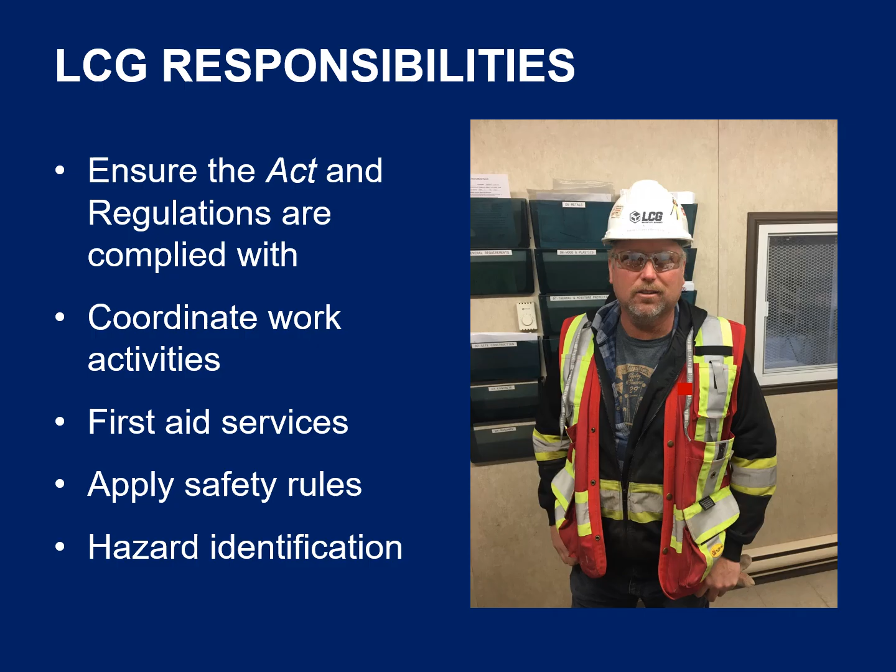Your safety is very important to us. Let's discuss the key health and safety responsibilities for this project. As the general contractor on this project, LCG has several key responsibilities. They include ensuring all project personnel comply with the Act and regulations, coordinating the work activities of all contractors, making sure first aid services are available, applying the safety rules for this project, and raising awareness of potential hazards on the worksite. All contractors on this project, including LCG residential builders, are considered employers.

Each employer has the following key responsibilities and must establish safety policies, programs, and procedures for their employees, provide appropriate training, instruction, and supervision for their workers, correct unsafe acts and unsafe conditions, and ensure the necessary equipment, materials, and protective devices are provided to do the job safely. All employers on the project must also make sure a copy of LCG's Project-Specific Safety Program, or PSSP, is available to workers on the project, and that it has been reviewed and communicated so everyone understands the safety requirements, and maintain a safe and healthy workplace.

Every supervisor has an overall responsibility to ensure the health and safety of the workers they supervise. To help ensure worker safety, all supervisors on this project are responsible to provide workers the necessary written instruction and training to perform their work safely. This includes making sure workers receive a safety orientation to the project, conducting regular safety meetings with the crew, and providing any necessary training for tasks to be performed.

Supervisors must also develop safe work practices when the work requires it. They must also ensure the appropriate personal protective equipment is issued and worn, and make sure tools and equipment are used appropriately and are properly maintained. Supervisors are also responsible to inspect the work area weekly for potential hazards, advise workers of actual or potential hazards, correct any unsafe conditions, make sure all project safety rules are understood and followed, investigate and determine the cause of all incidents so corrective action can be taken, and lead by example by demonstrating a safety-first approach.

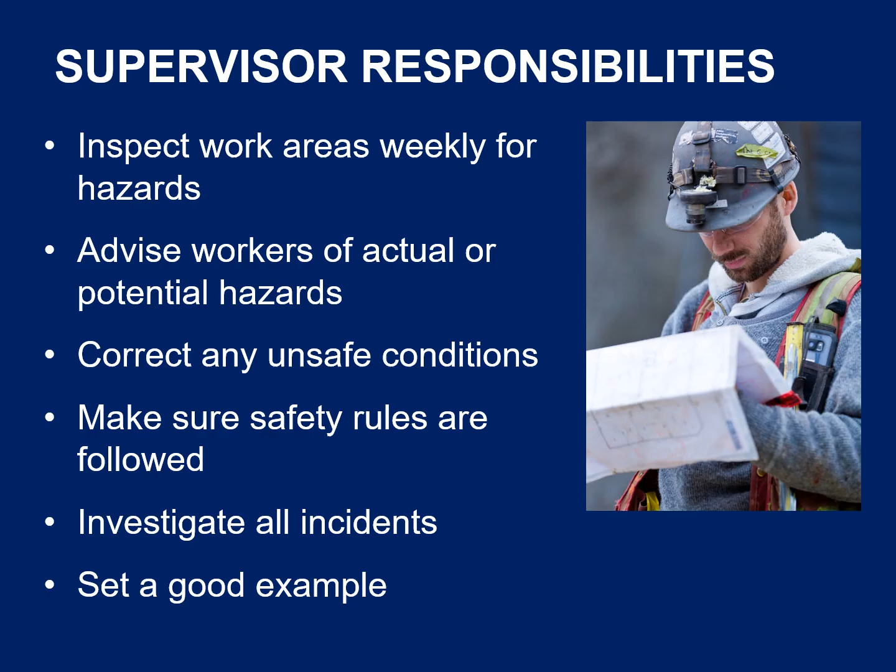As a worker on this project, you have specific responsibilities to assist in making this a safe and healthy worksite. You must comply with the Act and regulations. You are required to follow all safety rules on this project. If you are unsure of the rules or have any questions about them, ask your supervisor. You must immediately report all hazards or unsafe conditions to your supervisor so the conditions can be corrected. If you are assigned work that you believe to be unsafe or hazardous, you have the right and obligation to refuse to perform unsafe work.

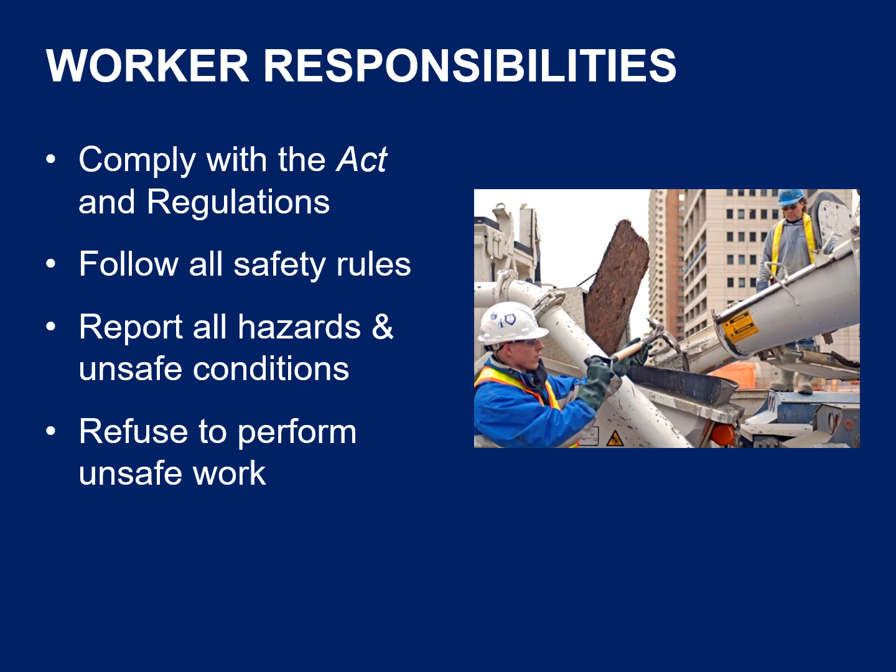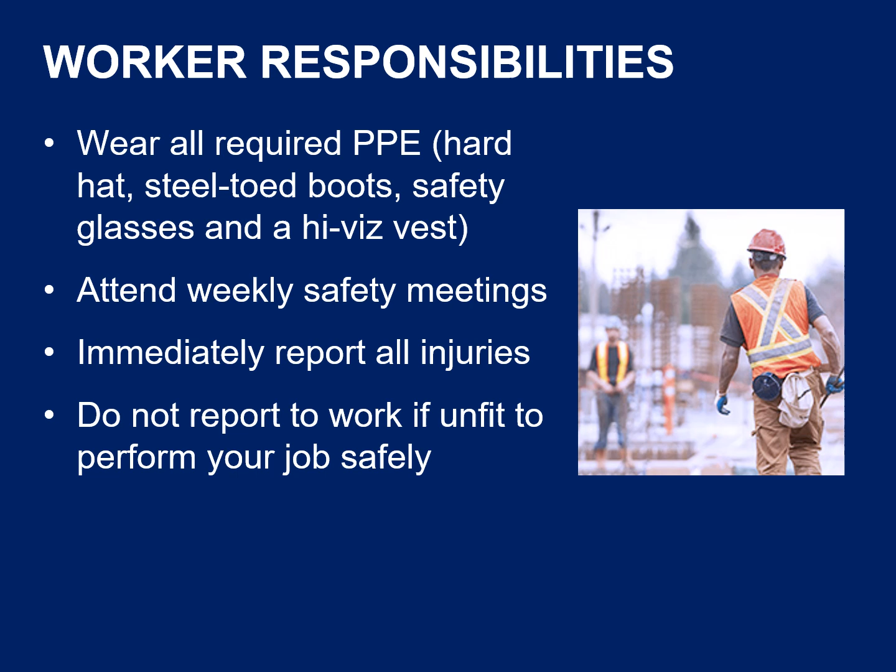For your own safety, wear all required personal protective equipment, as well as any other equipment necessary to do your assigned tasks safely. It is also your responsibility to attend and participate in your employer's safety meetings. If you are injured while working, report it to your supervisor and get assessed by first aid, no matter how minor the injury may be. Do not report to work if you are unfit in any way. If you are taking prescription medication for a medical condition, inform your supervisor. You may be assigned to a less hazardous activity to help keep you and others safe. Finally, if you have any ideas to make this project safer, share your ideas with your supervisor.

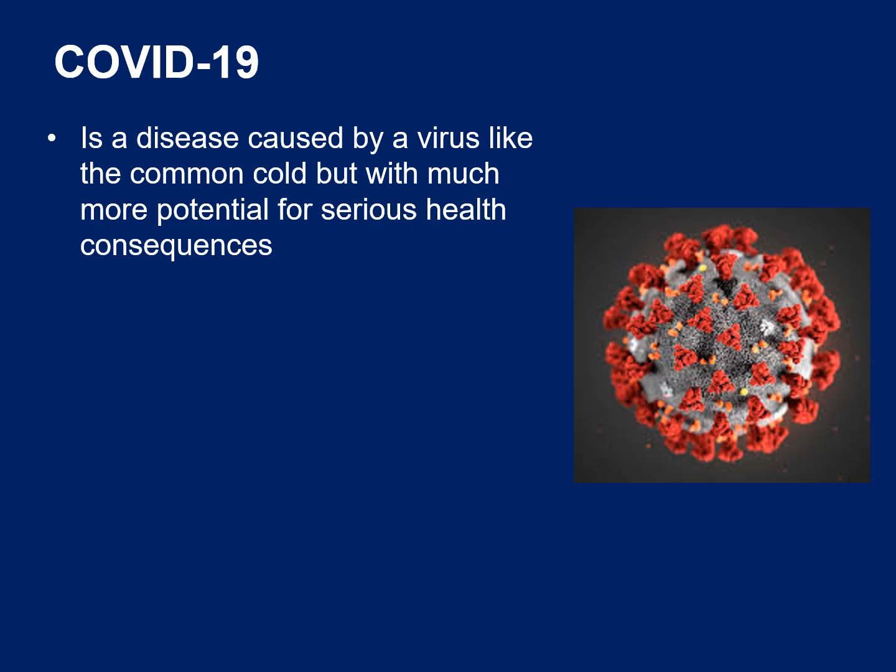How we conduct ourselves and our work on construction sites has changed because of COVID-19. COVID-19 is a disease caused by a highly contagious virus like the common cold, but with much more potential for serious health consequences. The principal mode of transmission is through contact with airborne droplets from sneezing, coughing, or possibly talking from an infected person. Some people have also become infected by touching contaminated surfaces and transferring the virus to their eyes, mouth, or nose. Your adherence to safety protocols at work and at home is a key to reducing the spread of COVID-19 and preventing infections between workers at the construction site.

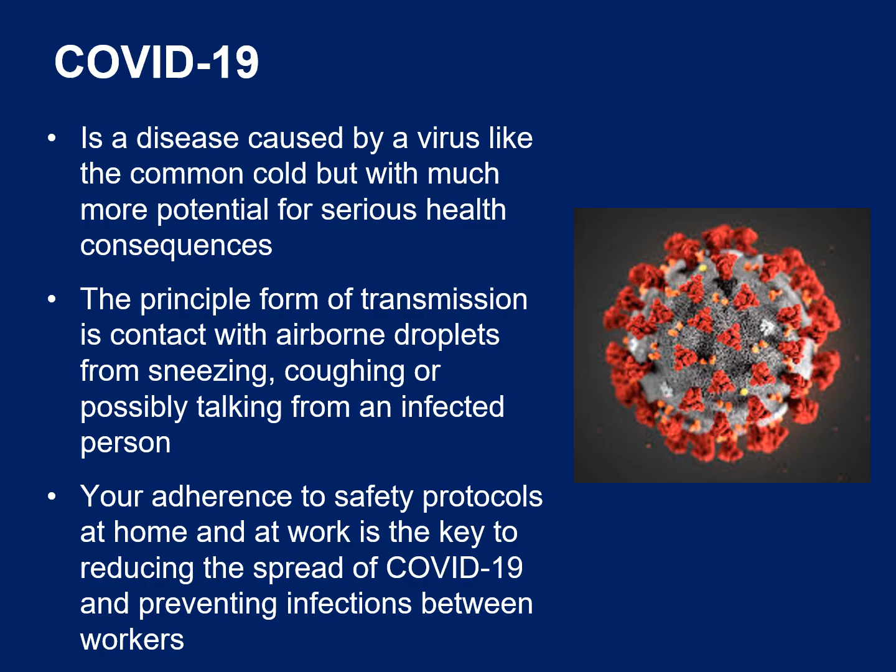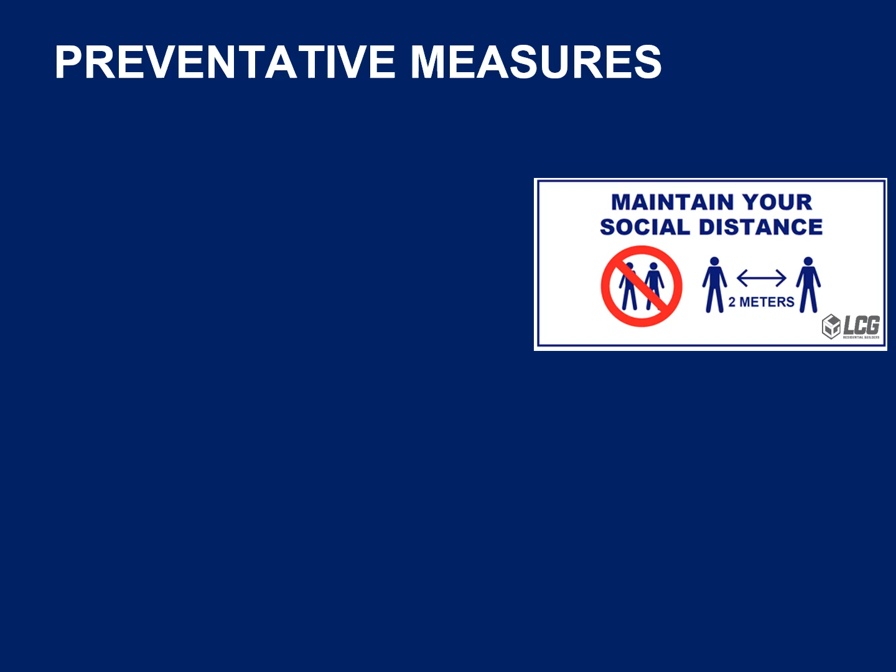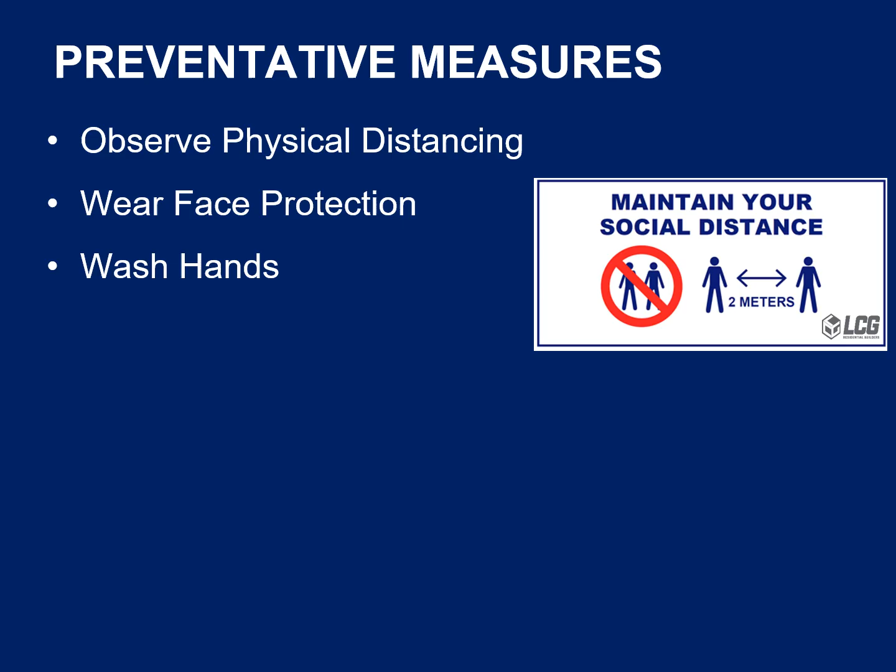LCG COVID-19 preventative measures are based on recommendations from the Public Health Authority and focus on physical distancing, hand washing, cleaning and disinfecting, specialized work procedures, and health monitoring. Physical distancing is the practice of avoiding close contact and maintaining 6 feet or 2 meters between each other. When this is not practicable, workers are required to wear a form of face protection. Hand washing, especially at the start of shift prior to work and at the end of shift prior to going home, are important methods for preventing COVID-19. Cleaning and disinfecting prevent the transmission of COVID-19 from frequently touched surfaces.

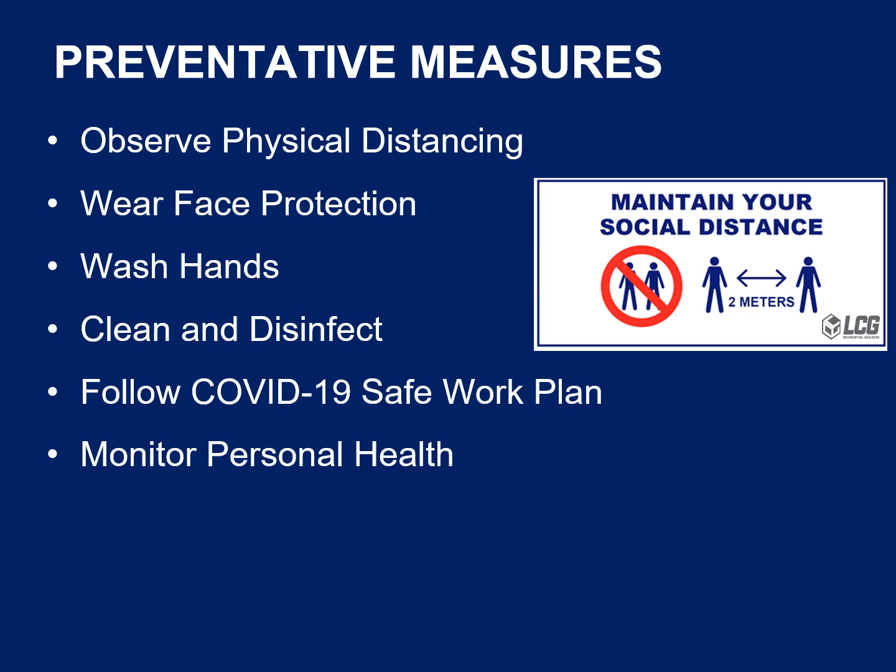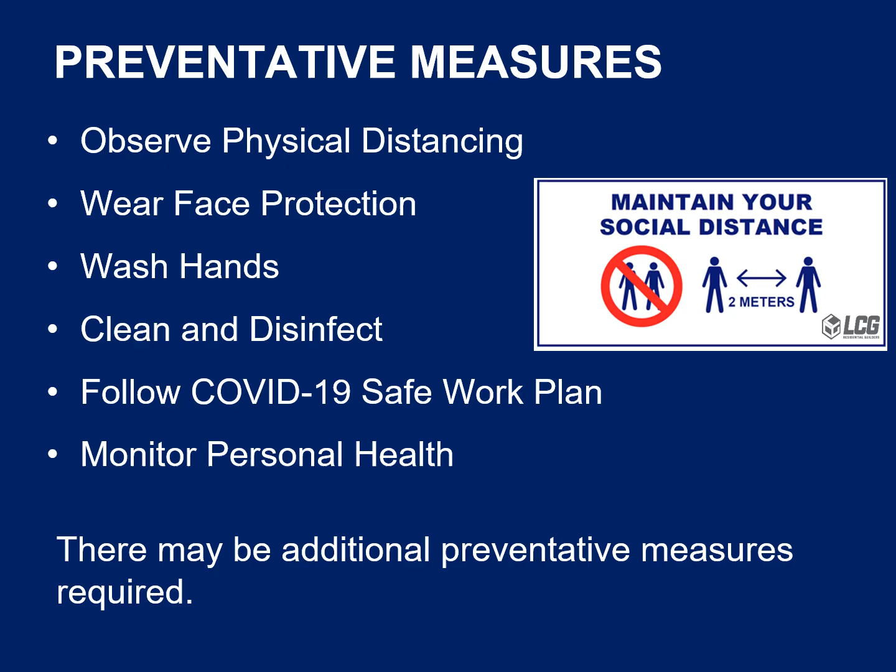Contractors are required to develop their own COVID-19 safe work plan. Ideally, this plan will organize work and workers to reduce contact between workers and limit the potential for transmission. Last and most importantly, workers must monitor their health and not come to work if they are exhibiting symptoms of COVID-19. LCG's health questionnaire and contractors' daily health check verification are organized to keep everyone involved and vigilant, monitoring workers for symptoms of COVID-19. There may be additional preventative measures required at this work location, and they will be reviewed with you at the conclusion of this presentation.

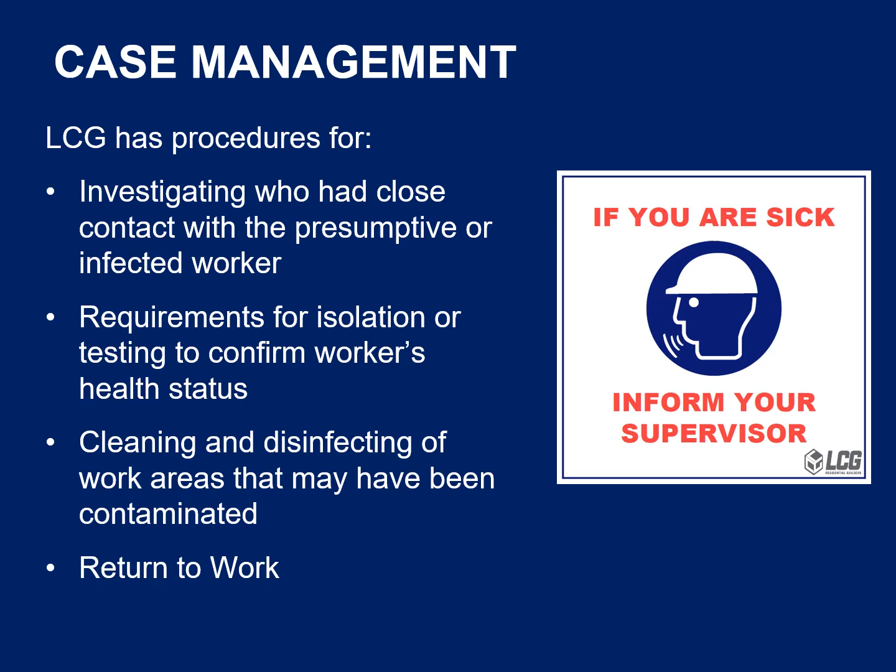In the event of a presumptive or positive case of COVID-19, LCG has procedures for investigating who had close contact with the presumptive or infected worker, requirements for isolation or testing to confirm worker health status, cleaning and disinfecting work areas that may have been contaminated to make them safe for workers, and return to work procedures. If there is a potential that you have been exposed, you will be notified.

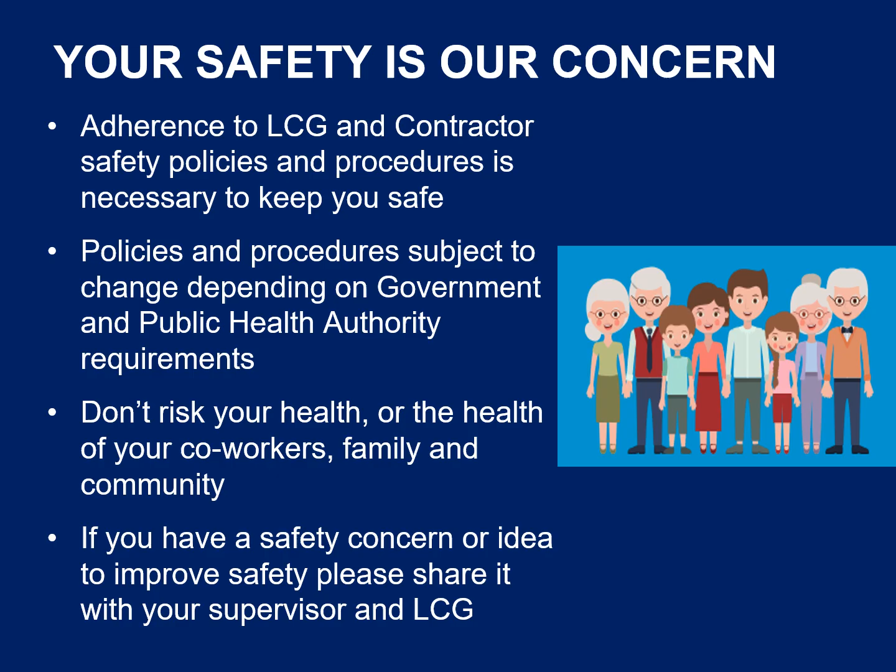Your health and safety is our principal concern. Adherence to LCG and contractor safety policies and procedures is necessary to keep you safe. These policies and procedures are subject to change depending on requirements of local government and public health authority. Workers who do not comply are risking their health, the health of all workers at the workplace, and the health of their family and community. If you have a safety concern or an idea to improve safety, please share it with your supervisor and LCG, and stay safe. We will now briefly describe the emergency response plan for this project.

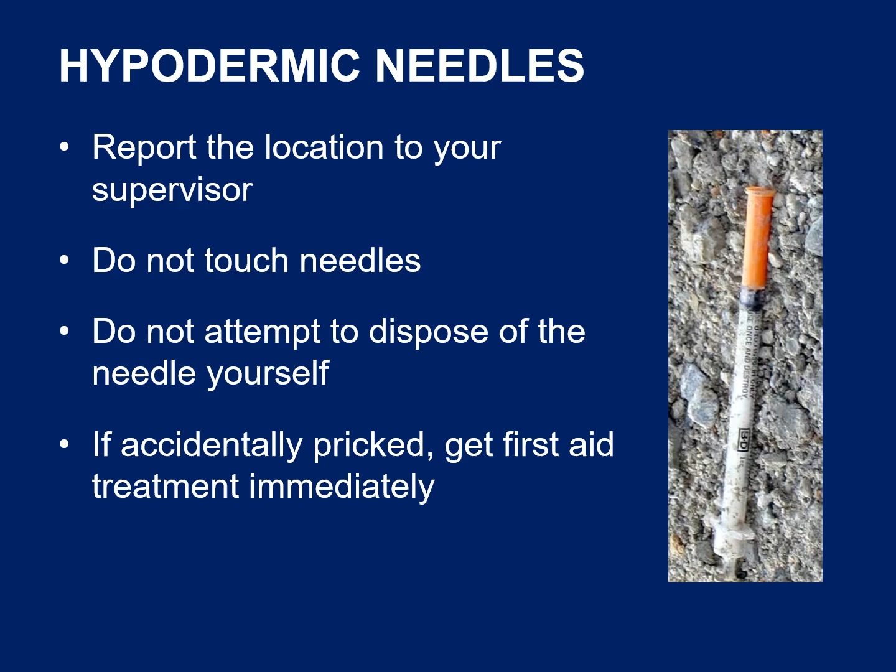If you find a discarded hypodermic needle on or near the project, report the location of the needle to your supervisor immediately. Do not touch any discarded needles as they may contain an infectious disease. Do not attempt to dispose of the needle yourself. If you are accidentally struck by a needle, report to the project's first aid attendant immediately. This section will describe the project's means of communicating health and safety information to you. To help keep you informed, please refer to the project information board posted at the main site office.

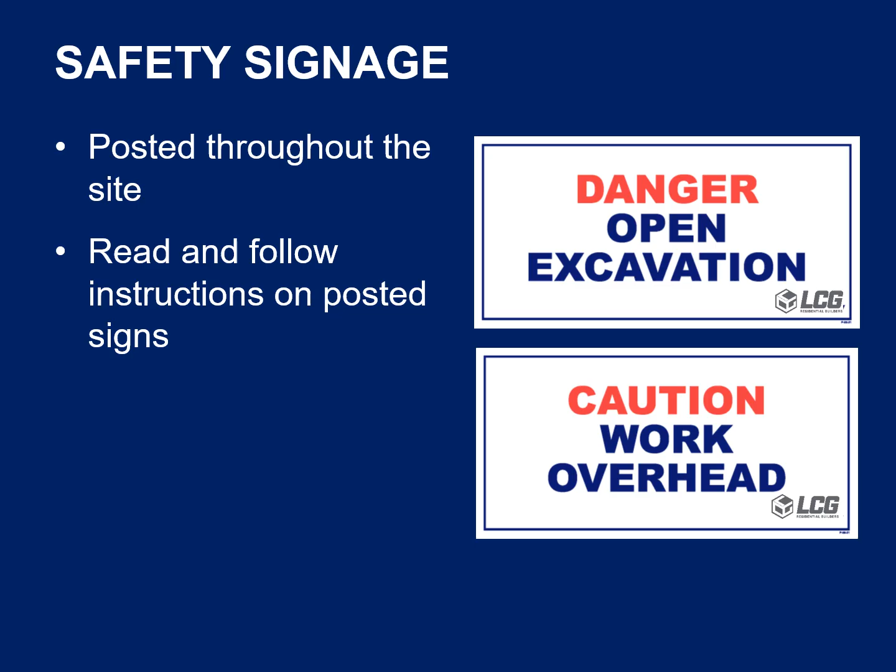Safety signs are posted throughout the site to warn you of potential hazards in the area. It is important that you read all signs in your work area and follow the instructions. If you place signs where you are working, please remove the signs at the completion of your work in the area.

Colored barricade tape will be used on this project to warn you of potential hazards in a marked area. Yellow caution tape means that there may be potential hazards and you should proceed with caution when entering the marked area. Red danger tape indicates there is an immediate hazard present and you are not to enter unless authorized by the crew that barricaded the area.

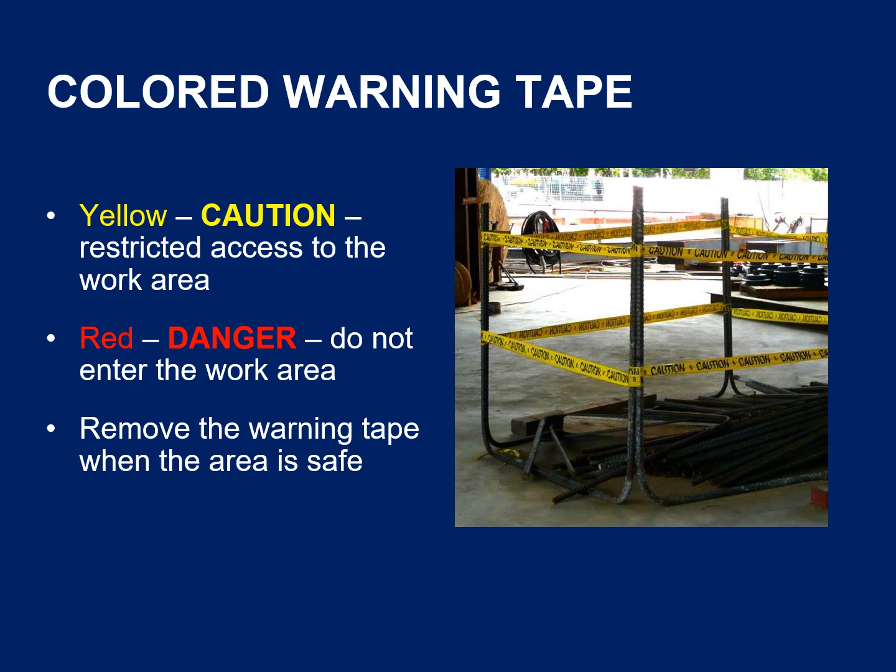If you use colored warning tape to mark a work area, we ask you to remove it when the area is safe for workers to enter. To assist in maintaining a safe and healthy work site, each employer must conduct regular documented inspections of tools, equipment, machinery, and work areas. The inspections must be conducted at intervals to prevent unsafe working conditions from developing. To help keep workers informed, safety inspections conducted by LCG superintendents will be posted on the Health and Safety Board.

LCG will organize a joint health and safety committee on this project where the number of regular employees exceeds 19 and where the project duration is expected to be over 3 months. The committee is represented at minimum by 1 worker and 1 management member. All recommendations for improved health and safety on site are forwarded to the LCG superintendent to take appropriate action. The minutes of all issues discussed and recommendations are posted on the Health and Safety Notice Board.

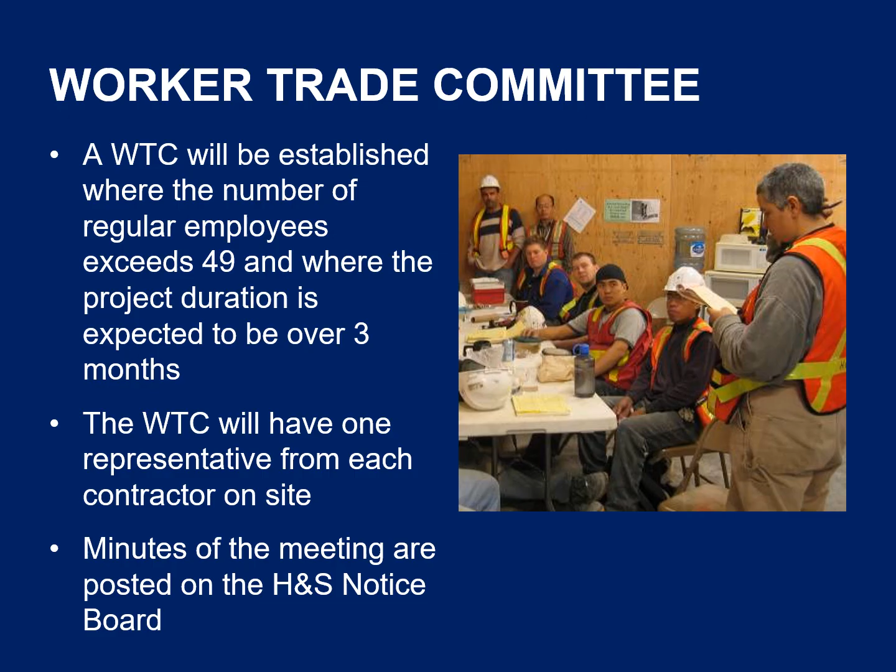LCG will host a worker trade committee on this project where the number of regular employees exceeds 49 and where the project duration is expected to be over 3 months. The committee is represented by 1 worker from every contractor on site, and the chair is elected by the members. All recommendations for improved health and safety on site are forwarded to the LCG superintendent to take appropriate action. The minutes of all issues discussed and recommendations are posted on the Health and Safety Notice Board.

To help keep everyone informed on health and safety issues, all employers must conduct a weekly safety meeting with their crew. You are required to attend your employer's safety meetings. If you have any safety concerns between your employer's scheduled safety meetings, please notify your supervisor immediately.

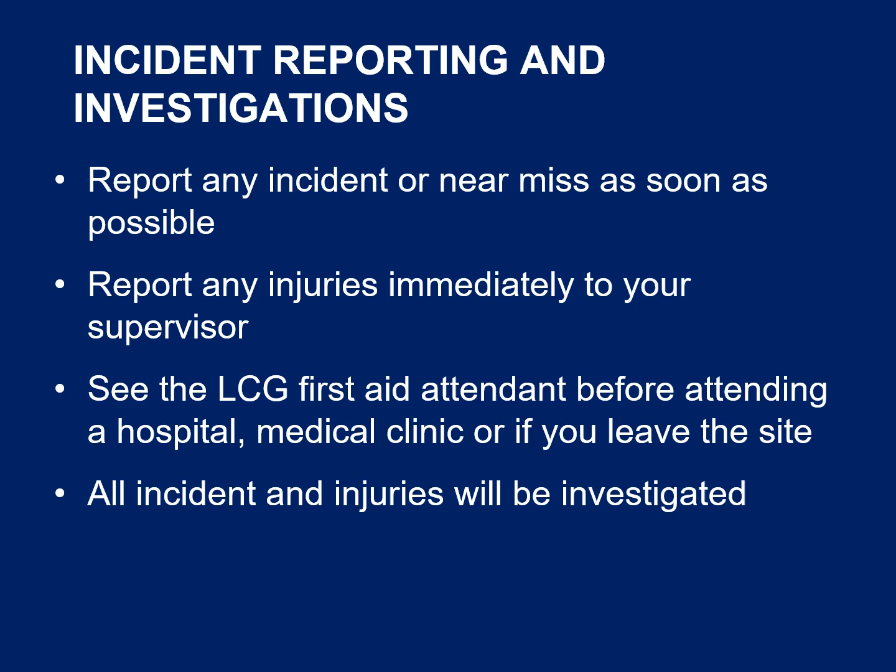It is your responsibility to report any incident or near miss to your supervisor or an LCG representative as soon as possible. If you have sustained an injury on this job site, please report your injury immediately to your supervisor and see the project first aid attendant before you attend a hospital, medical clinic, or leave the site. All near misses and incidents will be investigated to ensure the appropriate corrective measures are in place. The investigation results and corrective measures will be shared with you.

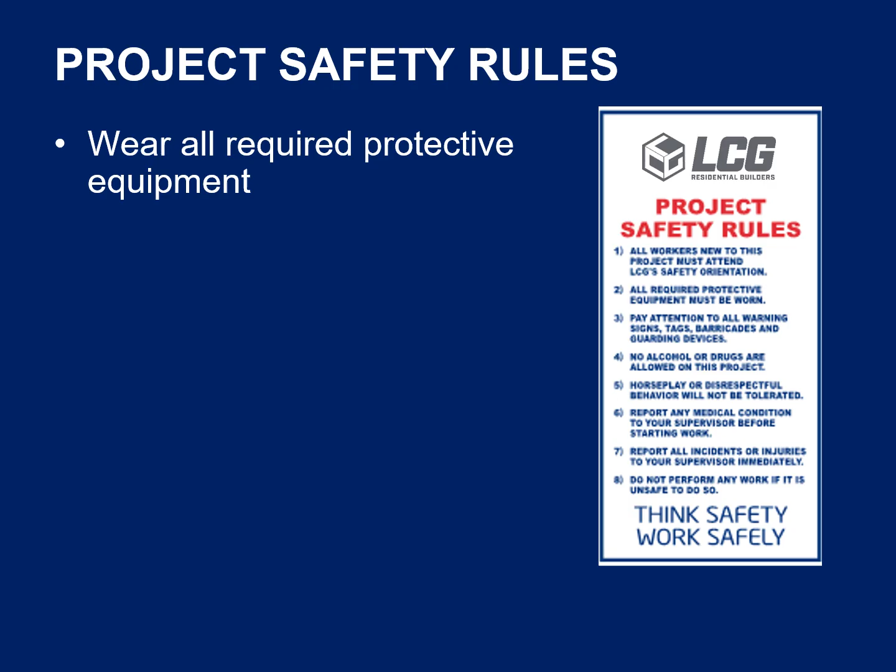We will now review some of the important safety rules for this project. As a worker on this project, you have the responsibility to comply with the project safety rules, including wearing all required protective equipment, not possessing or consuming alcohol or drugs, not engaging in horseplay or other inappropriate behavior, reporting all incidents and injuries to your supervisor immediately, and refusing to perform any unsafe work. For a more complete list, review the project rules in the back of the orientation checklist you were provided.

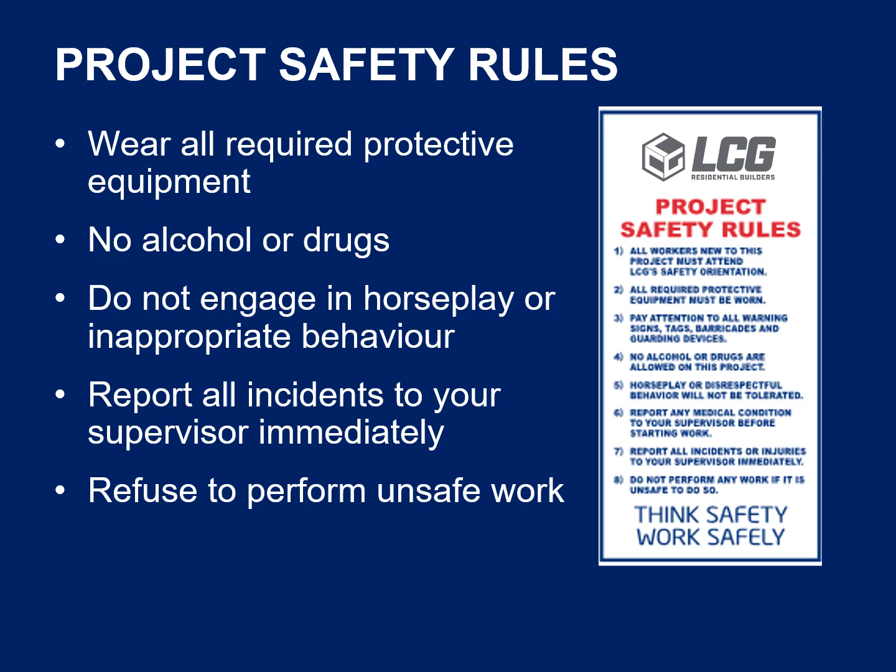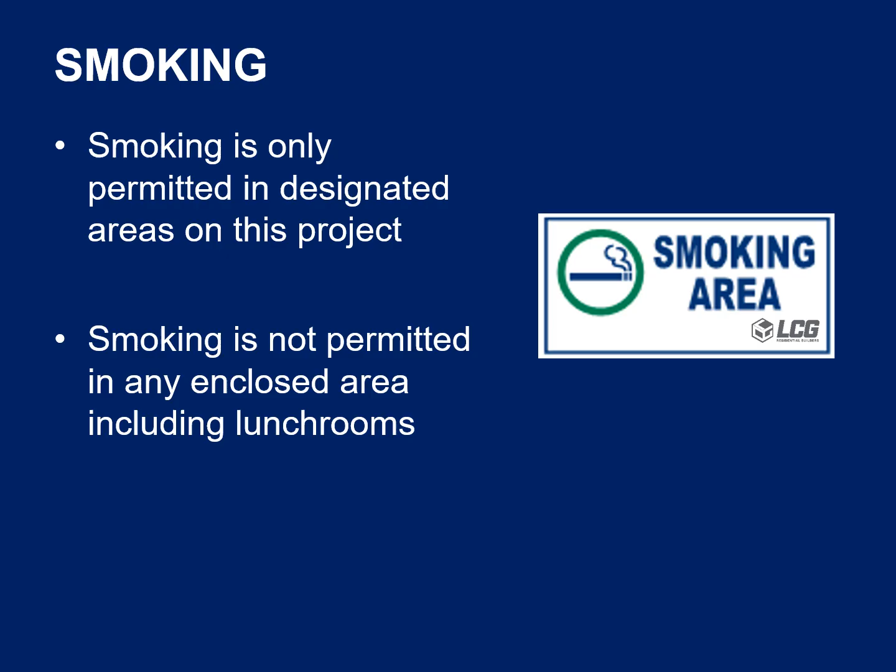You are only allowed to smoke in designated areas on this project. You are not permitted to smoke in any area where there are signs indicating no smoking, or in any enclosed areas of the building, in job site trailers, in any lunchroom, or in portable toilets and washrooms.

The use of portable music players and radios is not permitted on this project. Such devices can distract you and lead to an incident, or the sound can interfere with communications on site in the event of an emergency. Cell phones should only be used for work purposes and only if you are in a safe location and not operating any tools or equipment. All calls should be made away from the active work area.

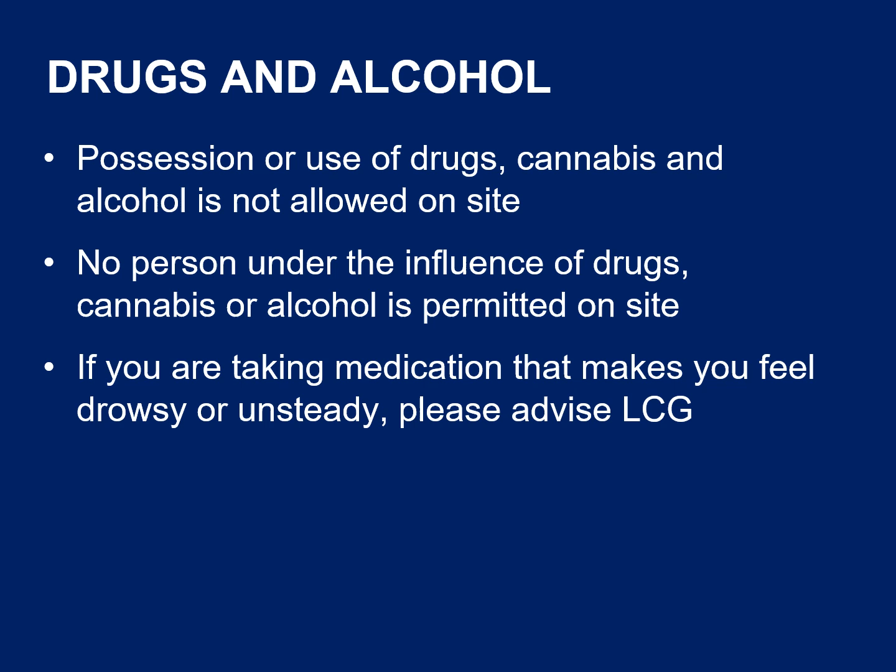The possession or use of drugs, cannabis, and alcohol is not permitted on any LCG project. No person under the influence of drugs, cannabis, and alcohol can be allowed on site for their own safety and for the safety of others. If you are taking medication that makes you feel drowsy or unsteady, please advise an LCG representative. Any person in violation of LCG Residential Builders' drug and alcohol rules will be immediately removed from the project.

Everyone has the right to a safe and respectful workplace. LCG's prevention of harassment and violence policy applies to all workers on this project. Harassment includes any unwanted comments or behavior that insults another person's race, gender, language, or religious beliefs. Harassment and disrespectful behavior will not be tolerated and may result in disciplinary action. You can find LCG's harassment policy posted on the Project Information Board.

Site photography is permitted for business and investigative purposes. Sharing project photos on social media is not permitted unless prior permission is obtained from LCG Residential Builders. Workers are not authorized to provide any information about this project to the media. In the event that media organizations focus their attention on this project, we ask that you politely decline to answer questions or provide comments, and that you direct all inquiries to LCG.

All workers and supervisors must follow the project safety rules. Anyone who does not follow these rules could be subject to disciplinary action, depending on the severity of the infraction. Disciplinary action may range from a verbal warning to a written warning or removal from the project.

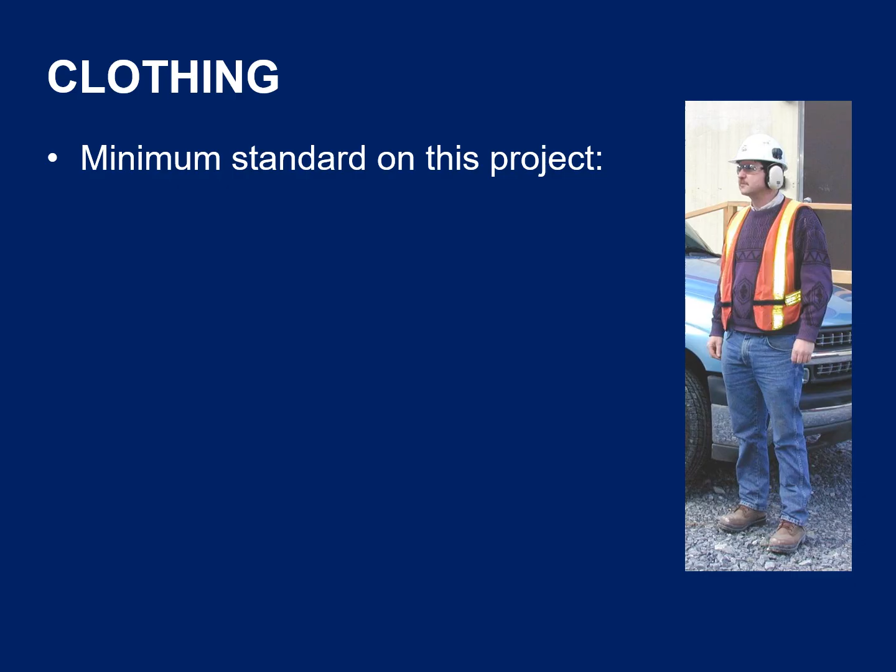This section will now describe the personal protective equipment, or PPE, required on this project. To help keep you safe at work, you need to properly equip yourself for the job. The minimum standard for personal clothing includes the following. The pant leg must extend to the top of your safety footwear. Your shirt must cover the shoulders and have sleeves at least 4 inches long. The following items are not acceptable to wear on site: sleeveless t-shirts, shorts, running shoes, and any clothing that contains offensive messages or graphics.

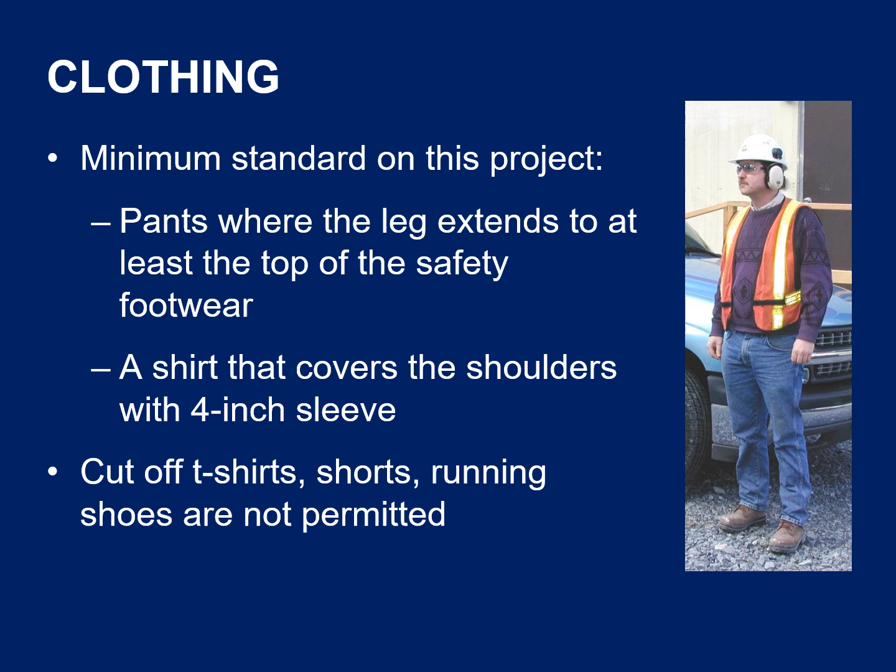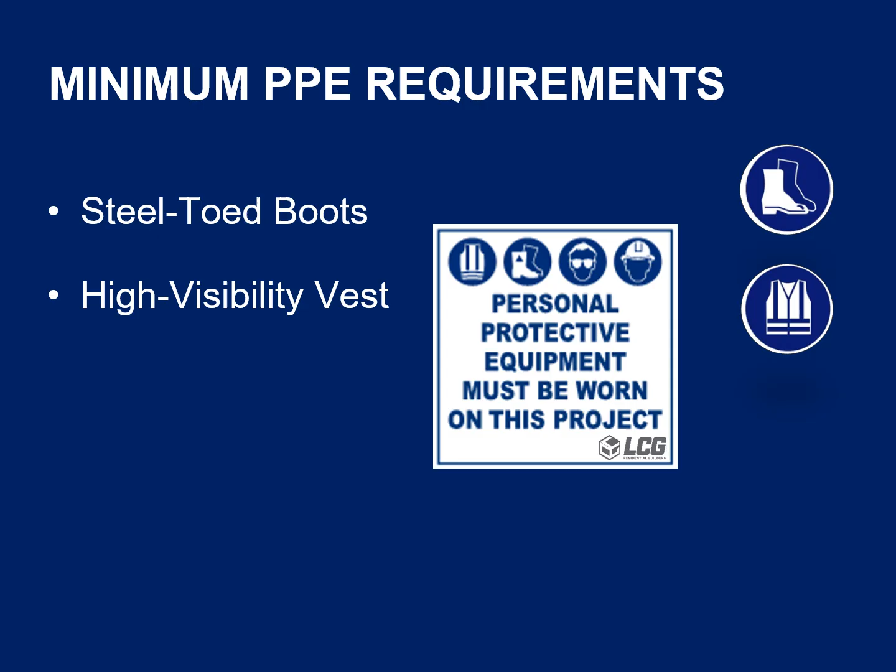The minimum PPE requirements that every person must wear on this project are steel-toed boots, a high-visibility vest, safety glasses, and a hard hat. Some work assignments may require the use of additional PPE, such as hearing protection when noise in the work area rises above 85 decibels, or respiratory protection when moderate to high airborne dust concentrations are present. Other personal protective equipment may be needed for you to safely perform your work task, such as gloves, a face shield, knee pads, or chainsaw chaps. If you're not sure about what PPE is needed for your task, ask your supervisor.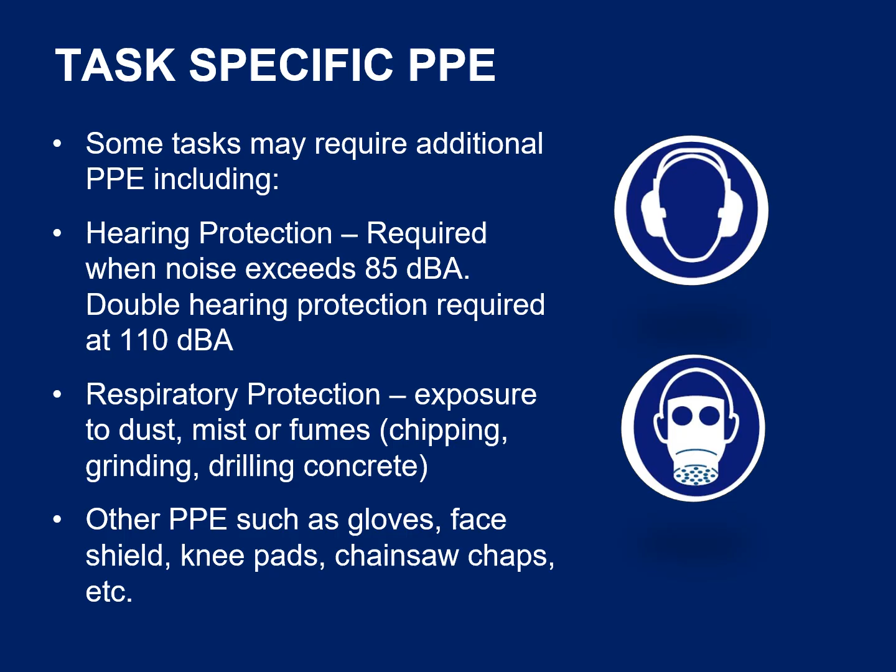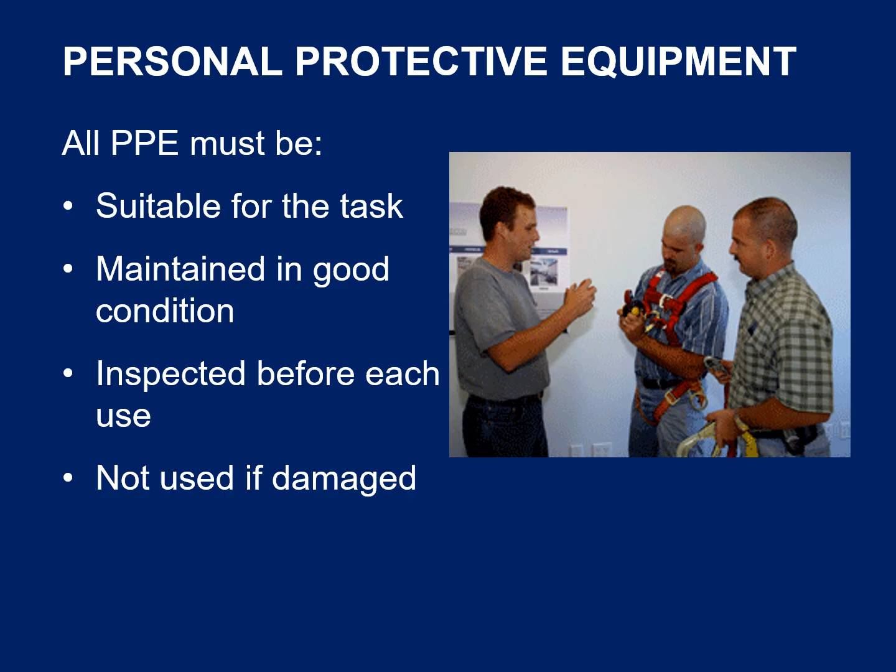Make sure that your PPE is suitable to the tasks you will be performing, and that all of your equipment is in good condition. It is best practice to perform a daily inspection for defects or wear on all of your personal protective equipment. Do not use PPE that is damaged. Return damaged PPE to your supervisor and request a replacement. The following potential hazards may be present on this project. We will describe methods to eliminate or control each potential hazard.

At times, construction work on this project will affect pedestrian traffic. When working in areas near the public, take measures to control your work area or prevent entry by pedestrians or cyclists. Post signs on sidewalks to give people advance warning of the construction work taking place. Install directional signage and barricades to detour people safely around the work area. Control pedestrian and traffic movement, and keep construction materials out of all public access routes.

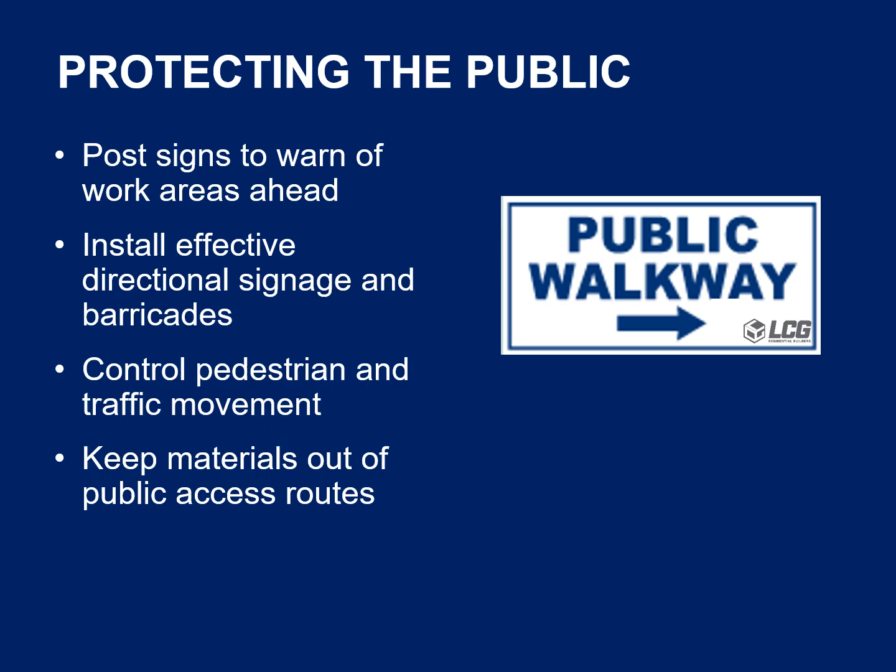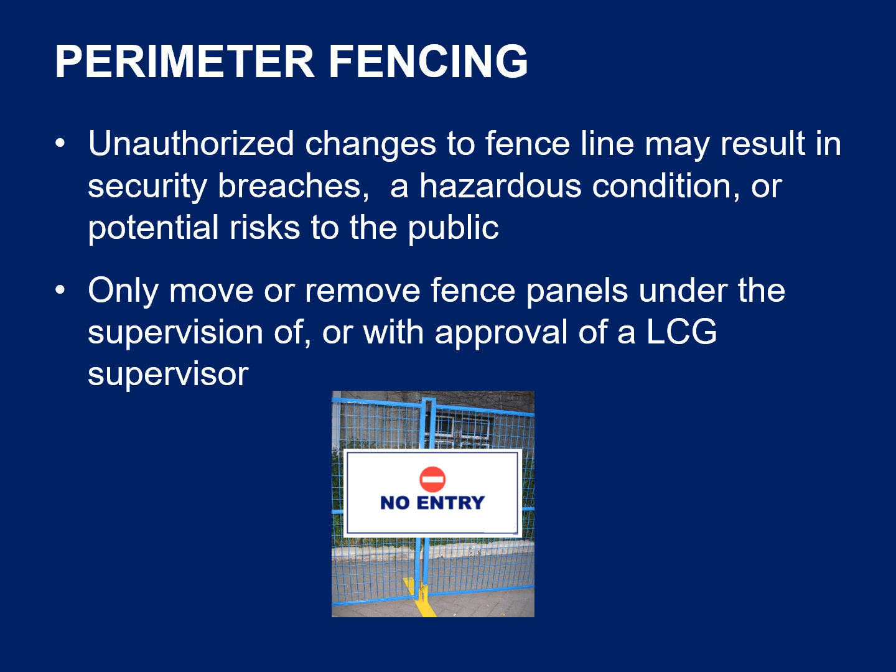Unauthorized changes to the perimeter fence line could result in security breaches or could lead to a potential hazard to workers or members of the public. Temporary fencing panels must be properly installed to prevent incidents such as fence sections falling over or people tripping on base plates. If sections of fencing need to be changed for temporary access to an area of the project, then LCG Residential Builders must be notified and permission must be obtained before any fencing is moved or removed.

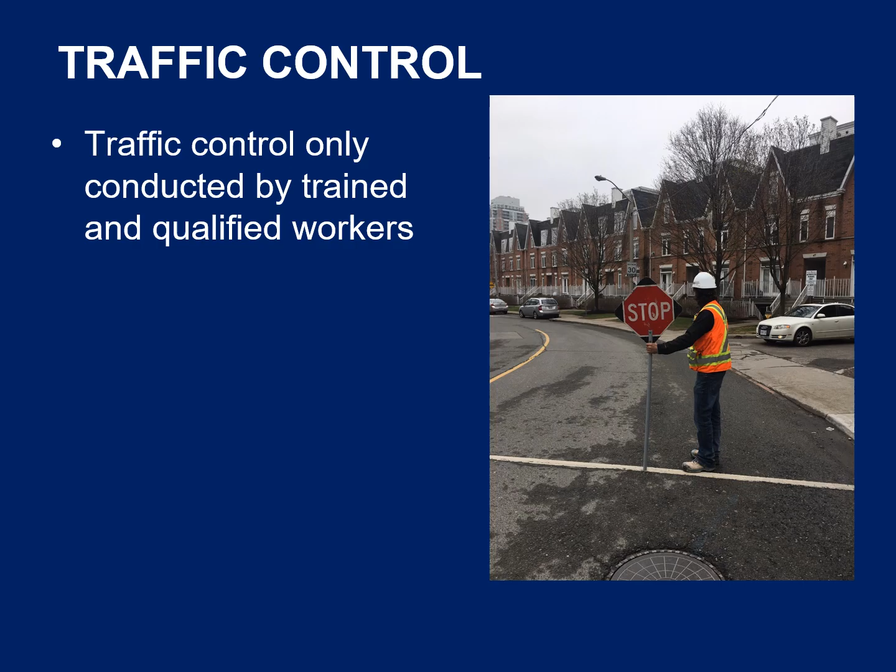When temporary traffic control measures are required, only trained and qualified workers are allowed to perform traffic control or flagging duties, no exceptions. A written traffic control plan must be in place before any traffic control work is performed. The traffic control plan will determine the type and location of all temporary traffic signage, delineators, and the use of the required PPE for the flaggers. All flaggers are to use the stop-slow paddles to clearly communicate instructions to vehicles.

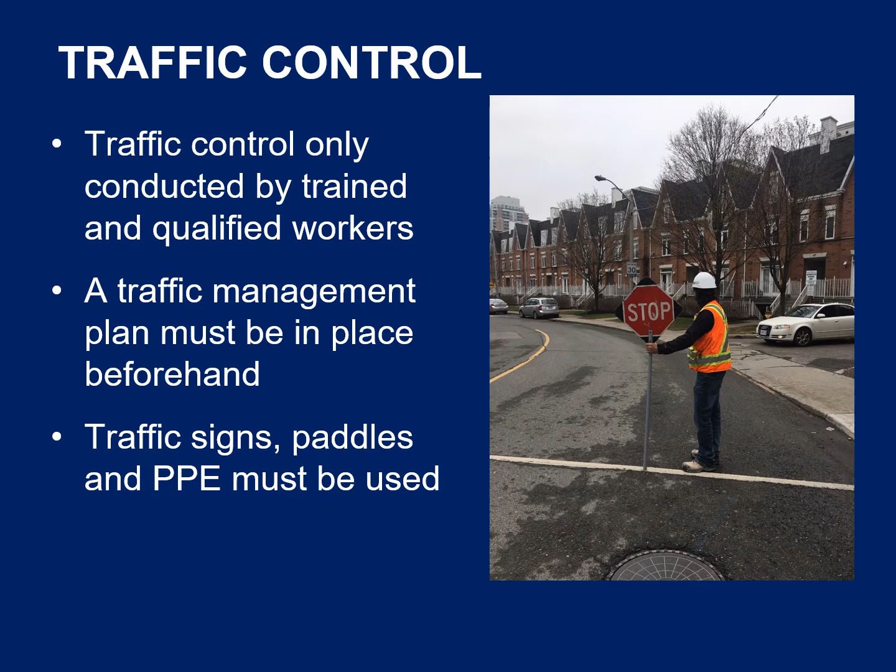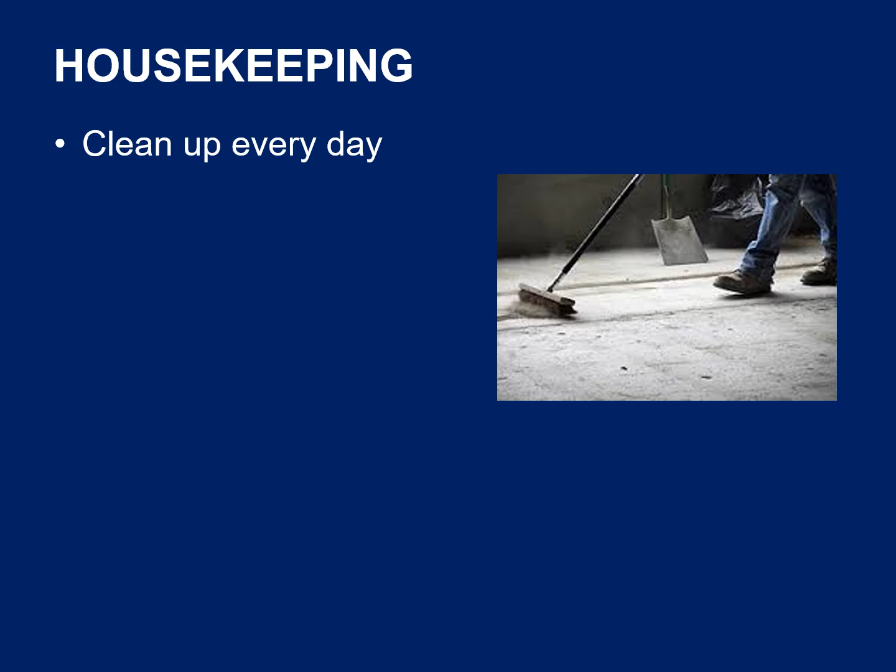Good housekeeping practices indicate a safe site. We ask that you do your part in keeping the project clean and tidy. Clean up your immediate work area before you leave it to go to another work area and at the end of each day. Keep construction debris, building materials, light strings, and electrical cords out of access or egress routes, such as stairwells, walkways, and doorways. Store materials in a safe area and tie down or secure material from falling into work areas or being blown from the building by high winds.

A network of underground utilities may be located on this project site. Exposing buried utilities can be costly and cause serious injury. This network may include gas, electrical, telephone, fiber optic, sewer, and water lines that could be damaged if you dig in the wrong spot. Always call your region's one-call center before you begin. Valid locates must be obtained and submitted to LCG and present in the operator's cab prior to any excavation.

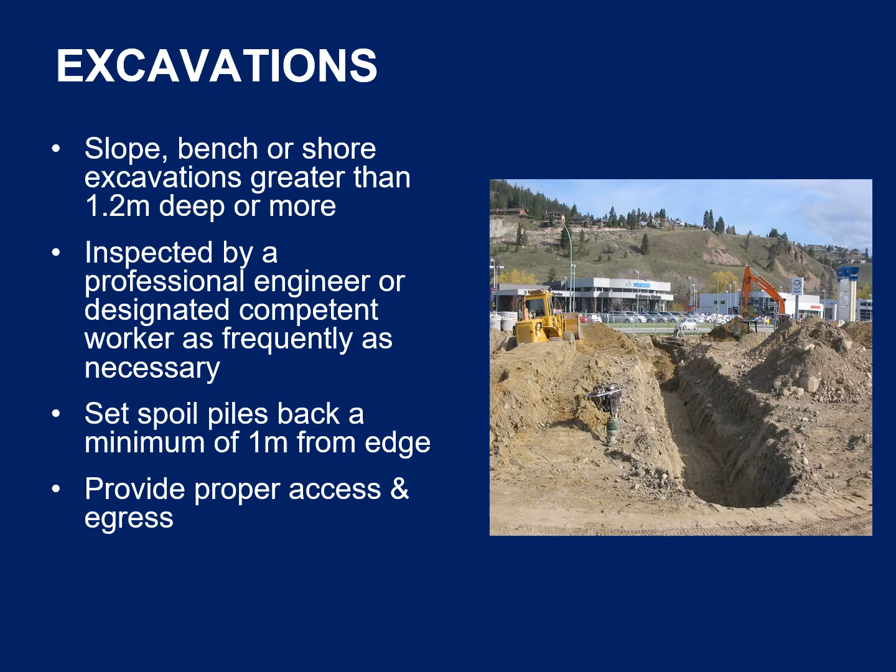If you are working in and around excavations, remember that excavations and trenches greater than 1.2 meters in depth must be sloped, benched, or shored, and that it must be inspected by a professional engineer or designated competent worker before you enter the excavation. Also remember that spoil piles must remain 1 meter back from the top of the excavation edge, and that all excavations must have safe access and egress systems, such as a ladder.

A confined space is a fully or partially enclosed space that is not both designed and constructed for continuous human occupancy, and in which atmospheric hazards may occur because of its construction, location, contents, or because of work that is done in it. Examples of confined spaces are large tanks, manholes, or stormwater sumps.

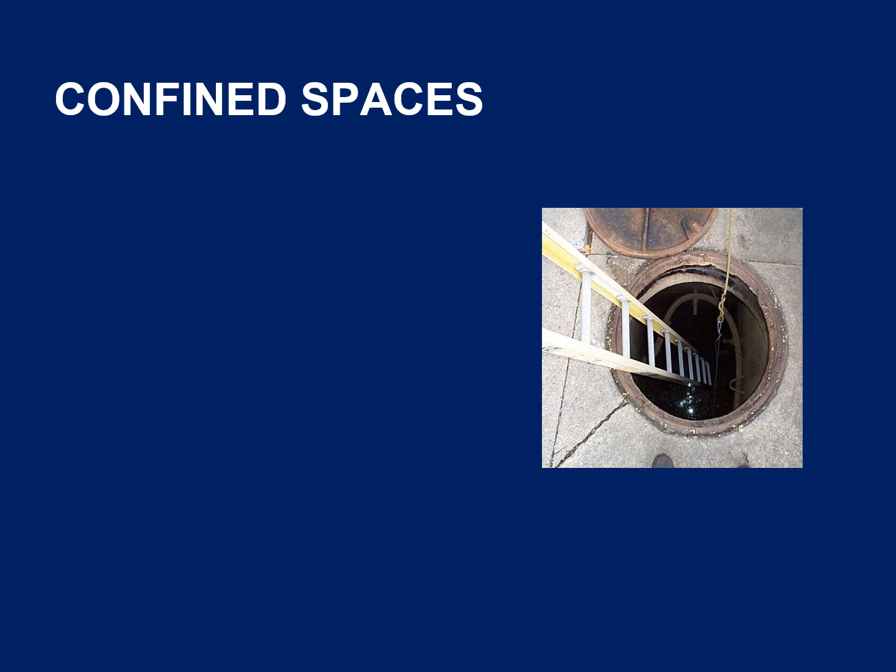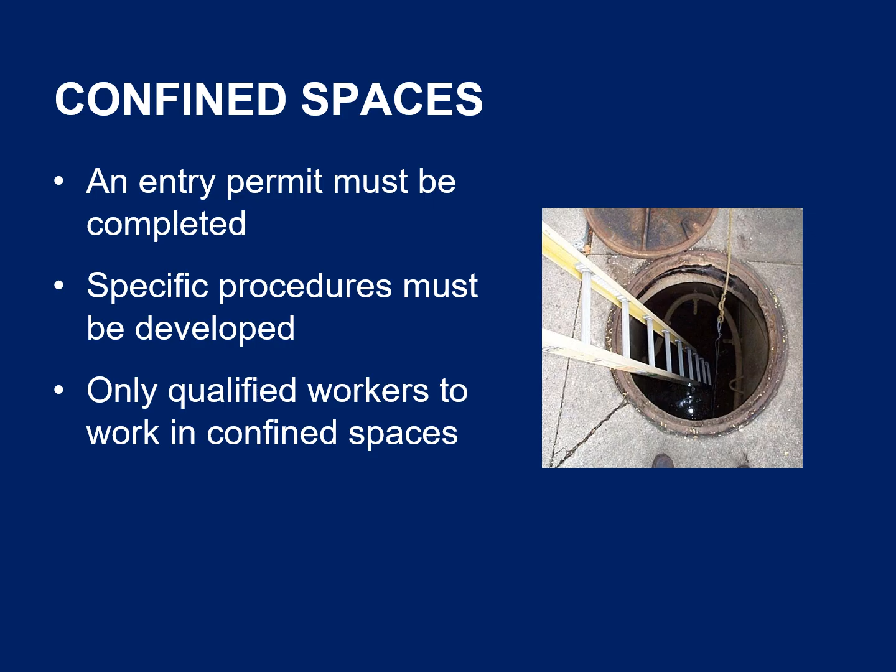A permit must be completed and approved by LCG before entering any confined space. Before entering the space, specific procedures and rescue provisions must be in place. Any worker entering a confined space must be properly trained. Air testing must be conducted before anyone enters a confined space.

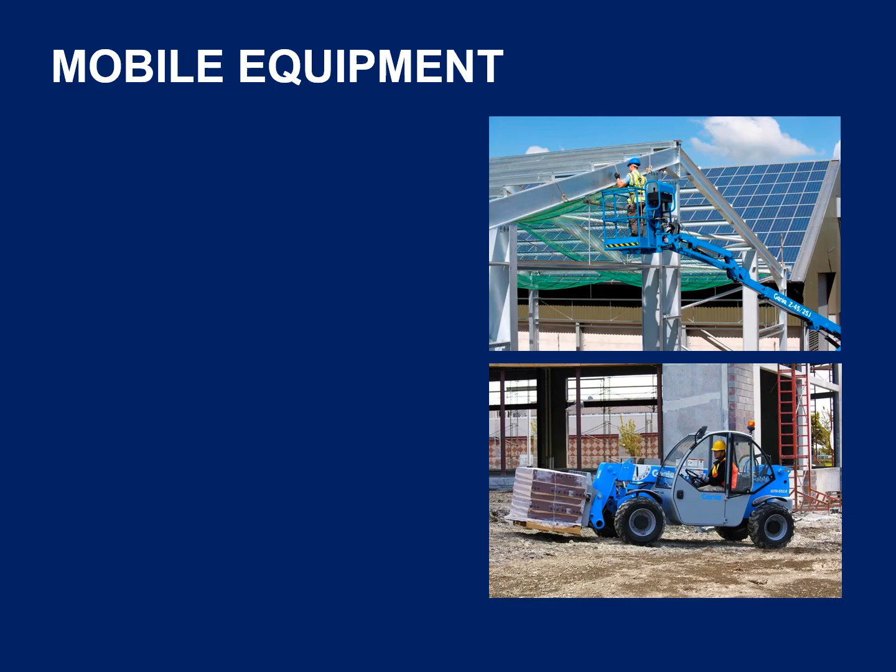There are several different types of mobile equipment on this site, including excavators, forklifts, and truck traffic. The operators of these machines may have a limited field of vision, so you are required to stay clear of the equipment when it is moving, wear a high visibility vest at all times in this project, and ensure you make eye contact with the operator before you walk in front of or behind any mobile equipment. All mobile equipment operators are required to perform and document a pre-operational inspection.

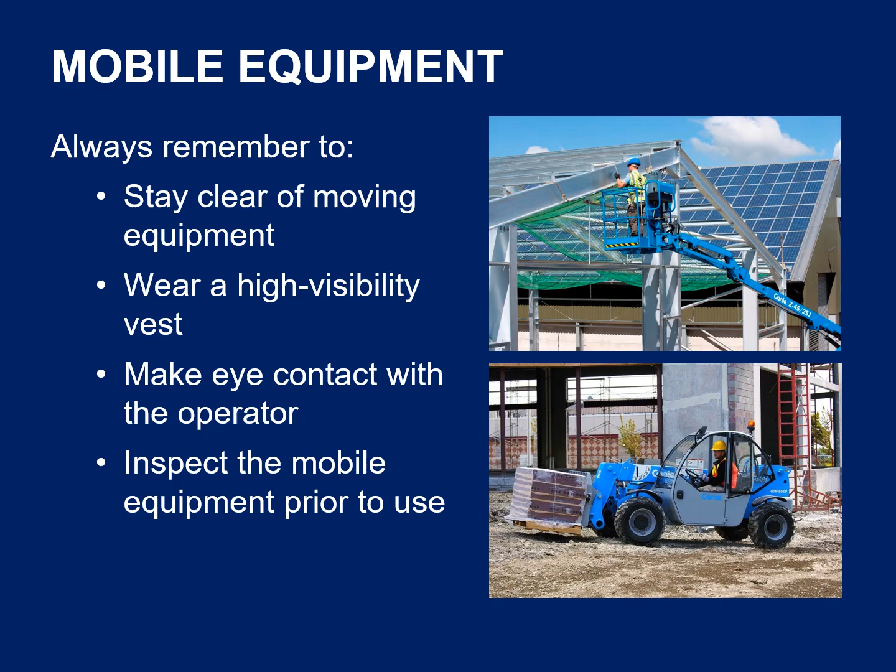At times, cranes, boom trucks, and concrete pumps will be used on this project. Only authorized workers are allowed to operate these machines. The crane operators receive their signals from authorized riggers. No other workers are allowed to signal the crane. If you require a lift to be made by the crane, speak to a designated rigger or the superintendent. Be sure to always stay clear of the operating zones. Look up and stay clear of any loads overhead.

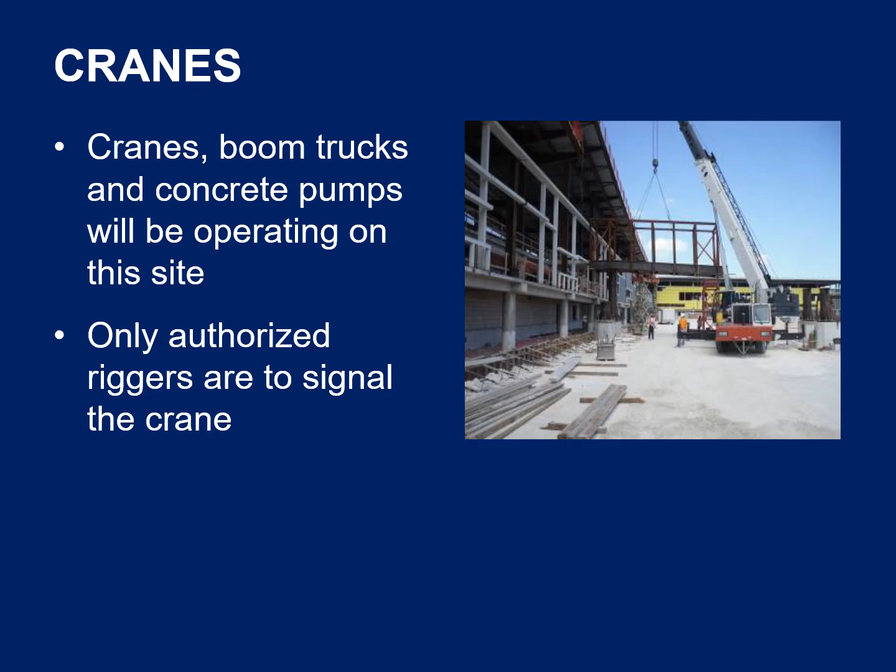Only qualified workers are authorized to rig material or equipment on this project. When rigging materials or equipment, the designated rigger must always inspect the rigging components for defects or damage prior to each use. Immediately tag any rigging that is found to be defective or damaged and remove it from the work area. Verify that the rigging is load rated for the lift to be conducted. Rig the load so that it is stable and secure, and consider attaching tag lines to help control the load.

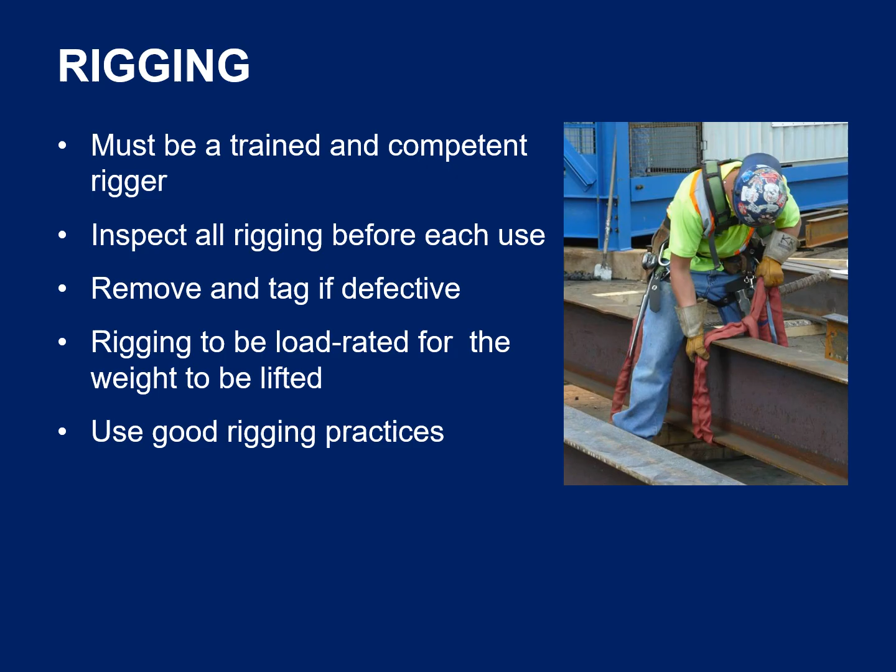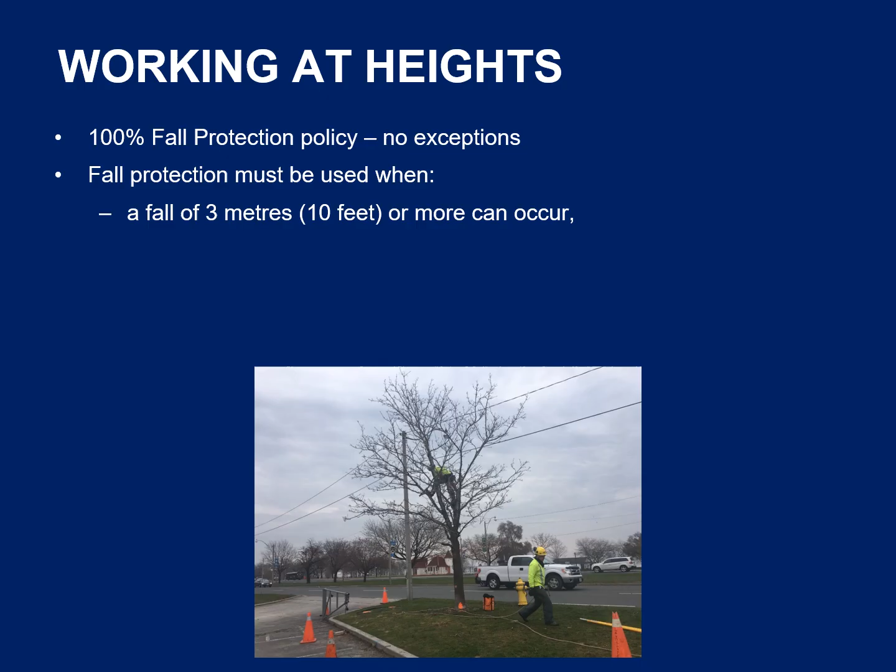This project has a 100% fall protection policy. This means that you must be protected by a fall protection system if there is a hazard of falling 3 meters, 10 feet or more, or an inherent danger of falling less than 3 meters, or there's an unusual risk of injury that can be prevented by using fall protection. Do not use any fall protection system unless you are trained and your supervisor has instructed you on the safe use and limitations of the fall protection system you are asked to use.

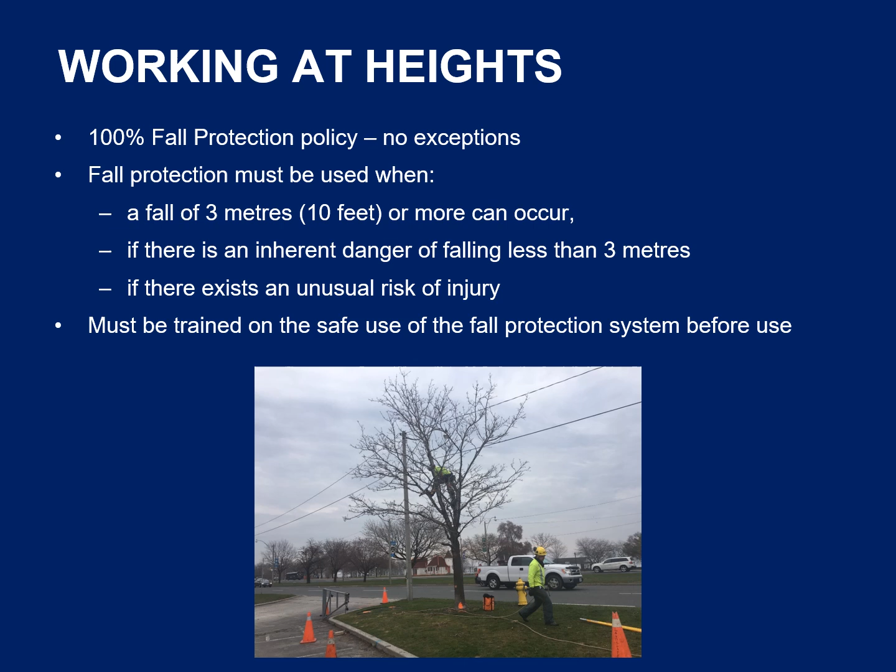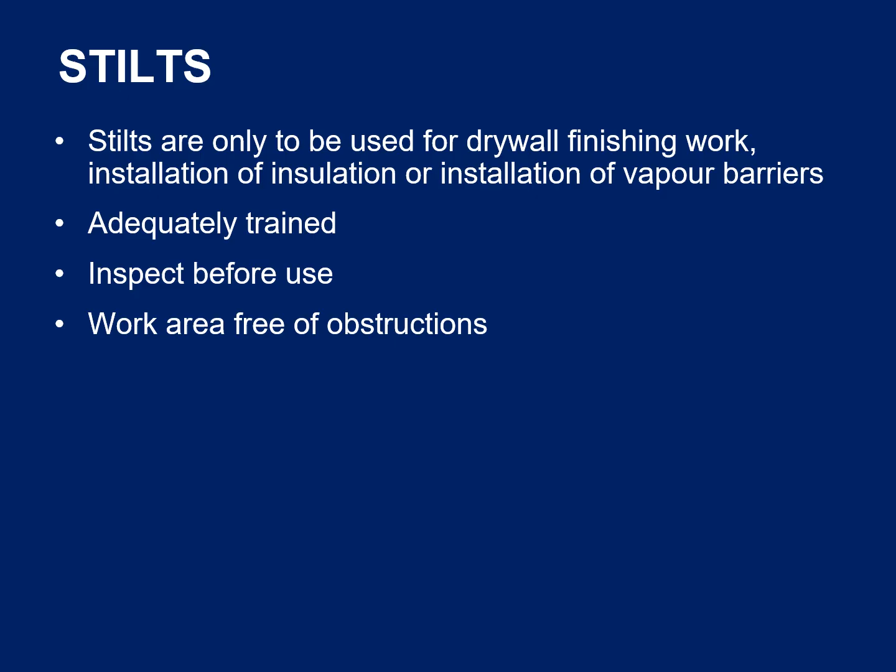Stilts may only be used for the purpose of drywall finishing work, installation of insulation, or installation of vapor barriers. Workers must be adequately trained in the safe use of stilts in compliance with the construction regulations. Stilts must be inspected daily before use. The work area must be free of obstructions and any openings in the work surface covered or guarded. An additional top rail must be installed where a guardrail system is in place.

Guardrails must be installed on all unguarded edges of any permanent floor or roof surface where a fall of 3 meters could occur. On temporary working decks or scaffolding, guardrails are required if a fall of 2.4 meters or more may occur. Large floor openings, including stair, large ventilation shaft, or elevator openings, must also be protected with guardrails.

This project requires all wood or wire cable perimeter guardrails to be further protected by the installation of orange safety fence or other protection, such as solid plywood barriers. This fencing or barrier prevents a person or material from accidentally falling through the openings in a guardrail. Do not remove any guardrail system unless another means of fall protection is provided to protect both you and other workers in the area.

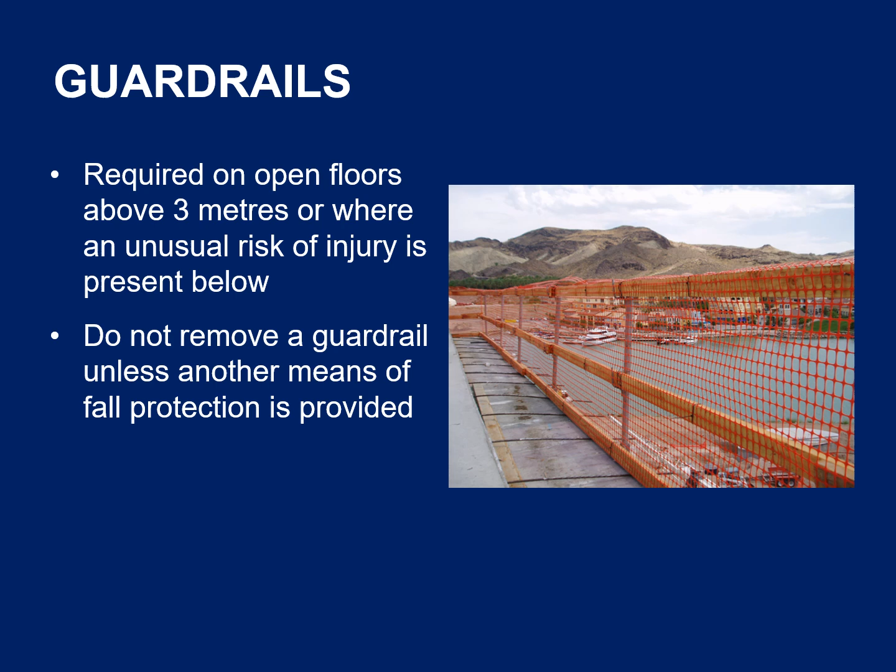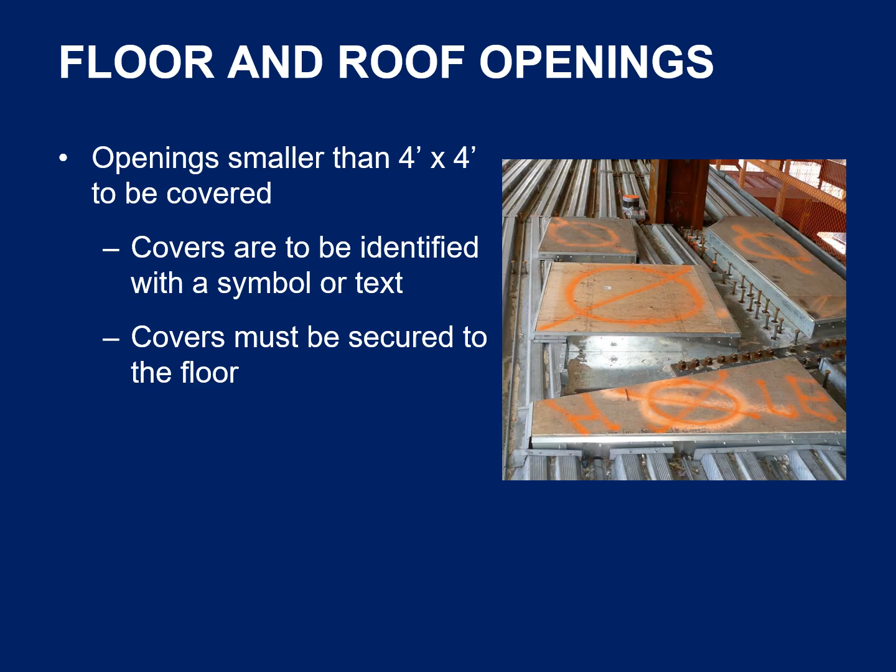Floor openings are to be covered with plywood that is capable of withstanding any load that is placed on it. Each cover must be identified with a symbol or the word hole to inform other workers of the potential hazard, and secured to the floor to prevent it from becoming dislodged. Openings that are large enough for a worker to fall through must have the cover securely fastened to the floor. Loose or unfastened covers are not allowed. Openings that are 1.2 meters or larger must have solid guardrails installed.

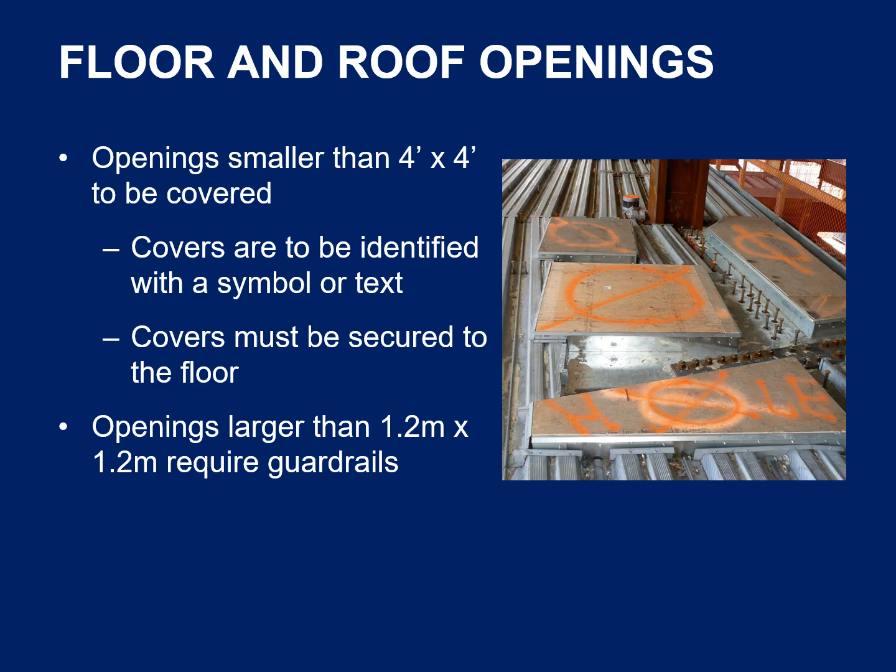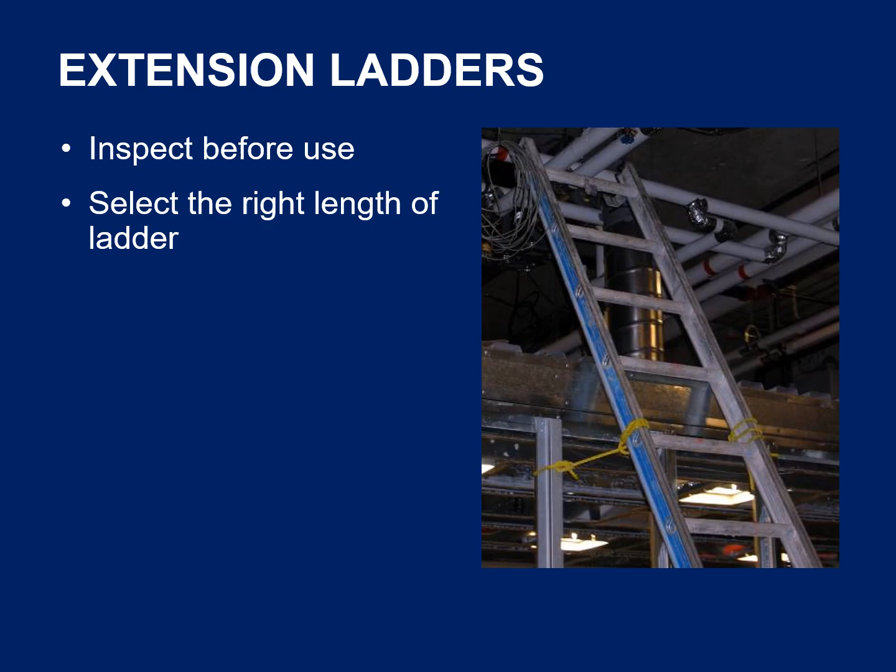Extension ladders are used to gain access to some work areas on this project. When using a ladder for access, inspect the ladder before you use it. If it has been damaged, it must be removed from site. Choose the right length of ladder for the job. Position your ladder on a 4:1 ratio for maximum stability.

Extend the ladder a minimum of 1 meter or 3 ladder rungs past the point where the top of the ladder contacts the structure. Secure the extension ladder at the top and bottom if possible, or have someone hold it in place for added stability. And always maintain 3 points of contact when climbing a ladder. You must not carry tools or equipment in your hands while climbing.

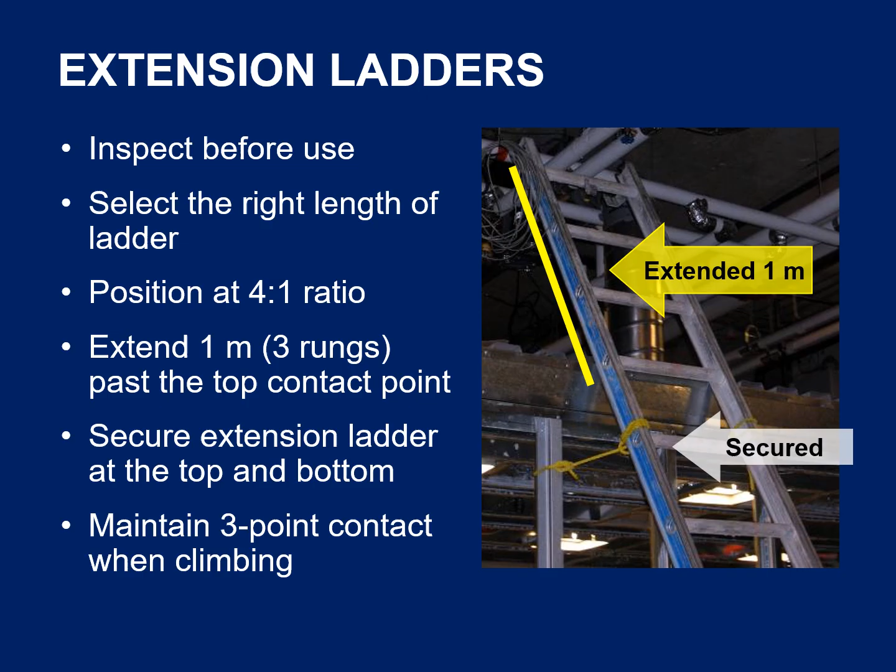Step ladders are widely used on this project. When using a step ladder, select the right length of ladder that puts you at a comfortable level to perform the work. Inspect the ladder for any damage before you begin work. If damaged, do not use the stepladder. Set the ladder up on clean and level surfaces to maintain stability. Don't stand on the top 2 rungs of a stepladder. You may have to use fall protection and tie off when on the ladder if there's a potential of falling 3 meters or more.

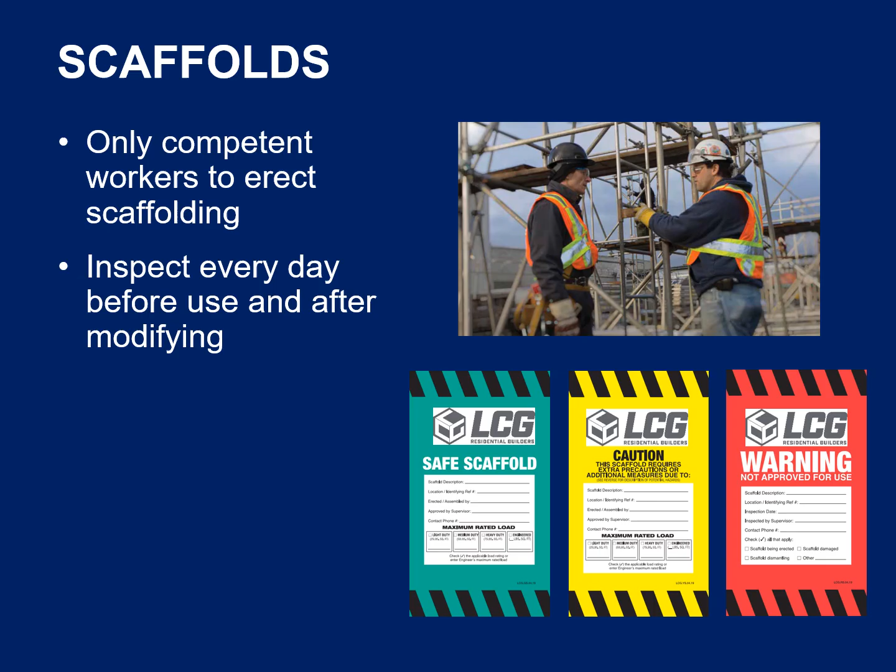Only competent workers are authorized to erect, alter, or dismantle scaffolding, or when under the direct supervision of a person who is qualified to do so. Always follow the manufacturer's specifications for the assembly and safe use of all scaffold systems. A scaffold system must be inspected every day before use and after any modifications have been made. Never work from a scaffold that is tagged "Warning, not approved for use."

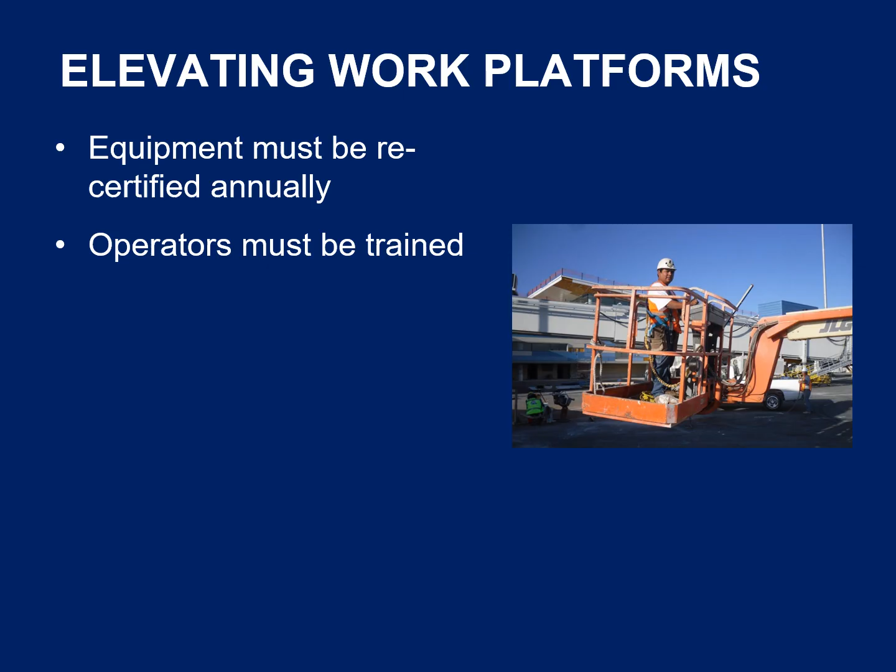All elevating work platforms used on this project, such as scissor lifts and boom-supported platforms, must be certified as safe for use. All persons operating an elevating work platform must be trained in the operational characteristics of the specific equipment. Daily pre-operational inspections must be completed and documented at the start of each shift where the lift is being used. During your inspection, make sure all guardrails and gates are in place.

It's important to note that fall protection is mandatory when working on elevating platforms. When moving the machine, check to make sure the travel surface is clear of obstructions or elevation changes because they could destabilize the machine.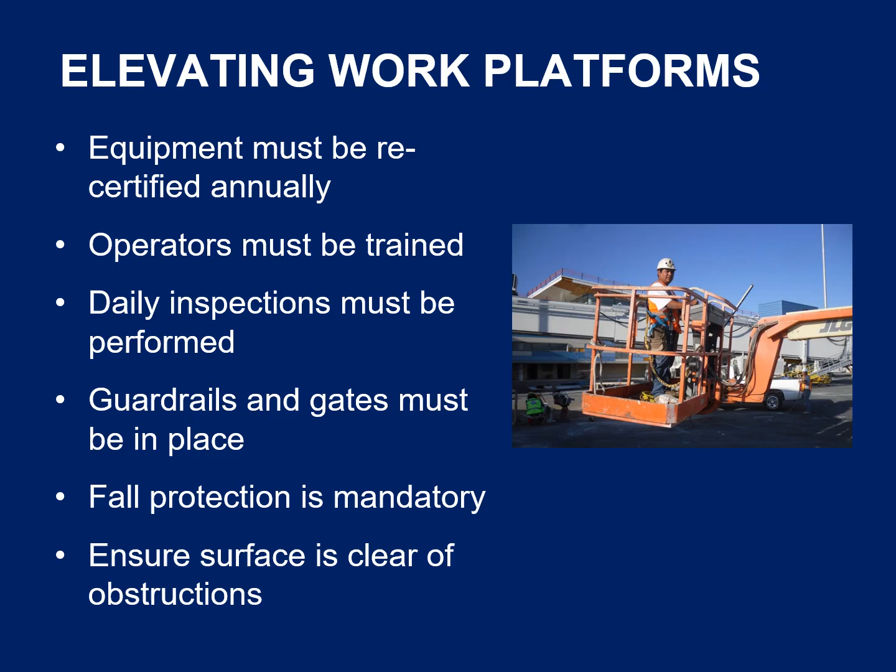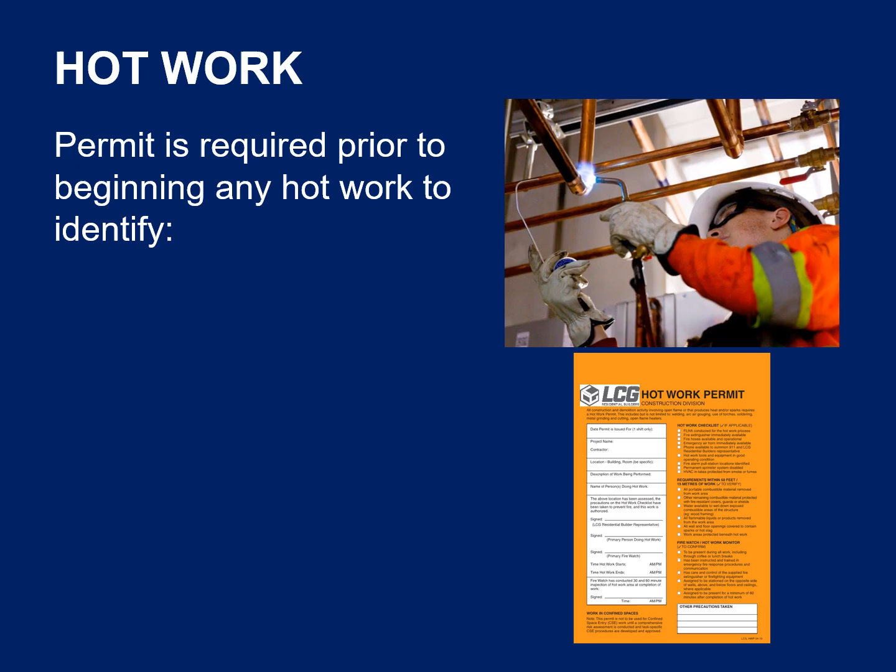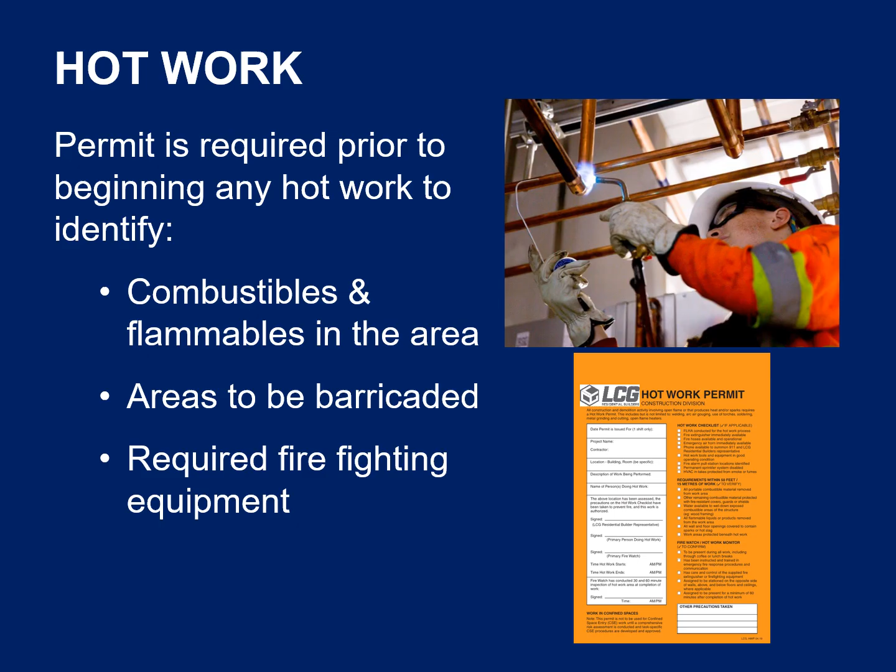Hot work involves welding, grinding, or similar work processes where flames or sparks are generated. Prior to performing any type of hot work, a hot work permit must be completed. If your company does not have a hot work permit process, contact an LCG representative on site. The hot work permit will identify any combustible and flammable material that is nearby, areas to be barricaded below or surrounding the work, the necessary firefighting equipment to have on hand in the event of a fire, and the requirements and duties of a person assigned to fire watch.

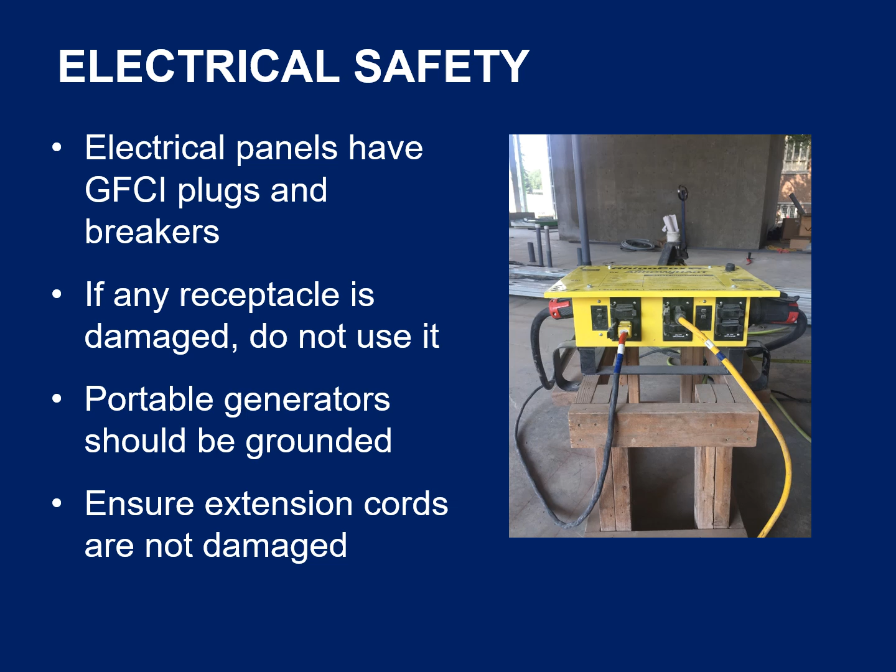The permanent power in your project may have been disconnected. The temporary electrical panels in this project are equipped with ground fault circuit interrupter plugs and breakers to protect you from electric shock. If you notice a damaged receptacle on any electrical panel, do not use it and inform your supervisor. Where portable electrical generators are used, they should be grounded to the steel structure or properly set ground rods. Make sure the electrical extension cords you use are not damaged and are in good working order.

Maintain all power tools in good condition. Inspect the tool or equipment before you use it to ensure it is working properly, and remember to wear all appropriate PPE when using power tools. For grinding and cutting tools, make sure the guards are in place and the correct type of disc or blade with the appropriate RPM rating is being used.

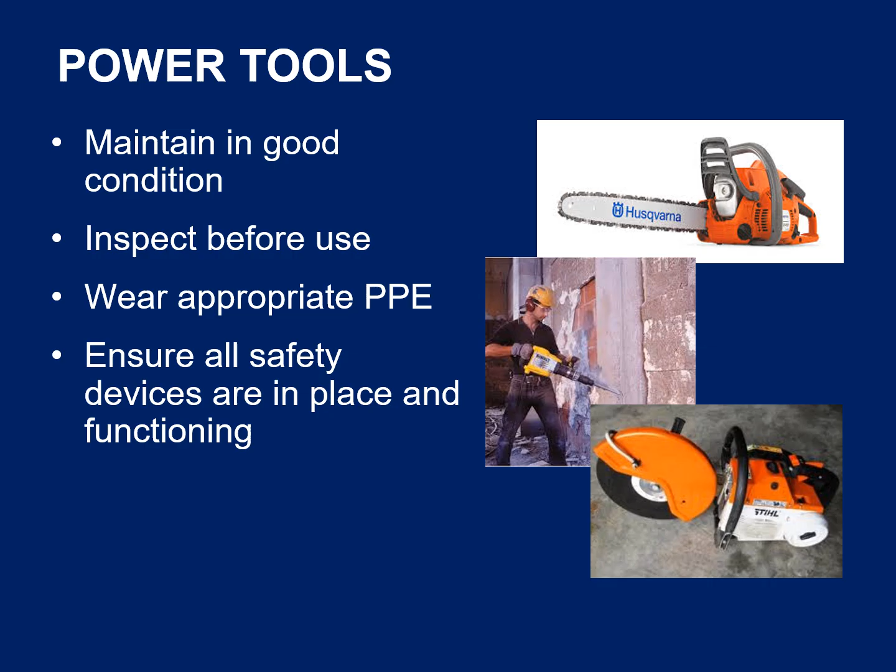If you find a tool that is damaged, you must remove it from service immediately. Tag it to identify the problem and return it to your supervisor.

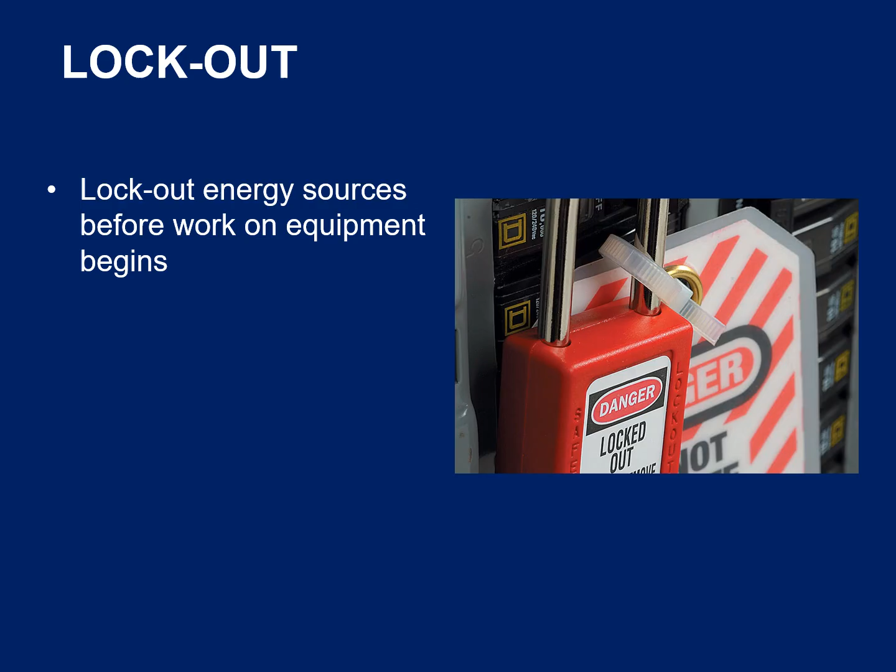Before working on any equipment where the unintended release of energy could cause injury, the source of energy must be locked out. LCG Residential Builders must be informed before any work requiring lockout begins. All lockout work must be performed in accordance with a written lockout procedure. Only qualified, competent workers may deactivate and work on mechanical or electrical systems.

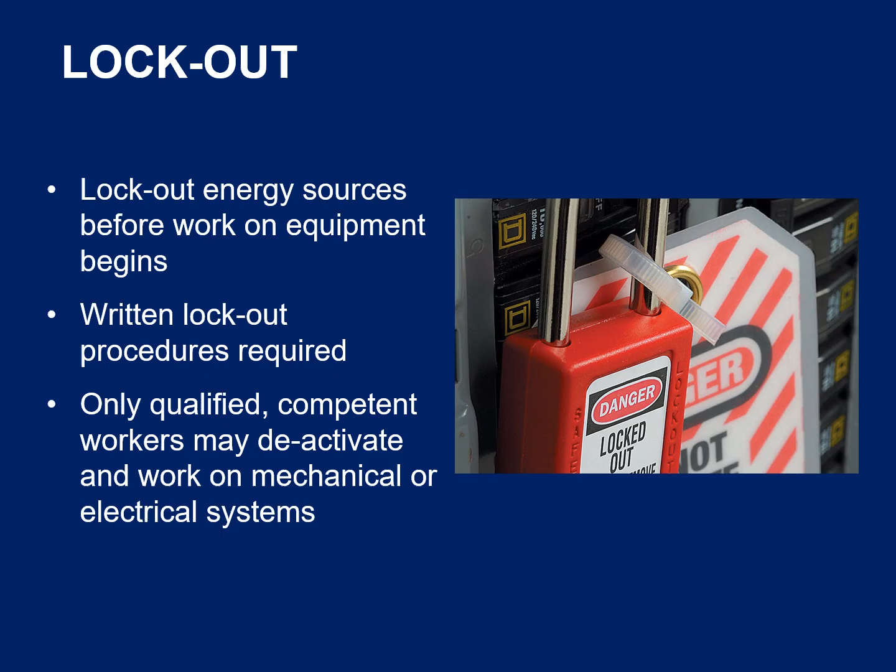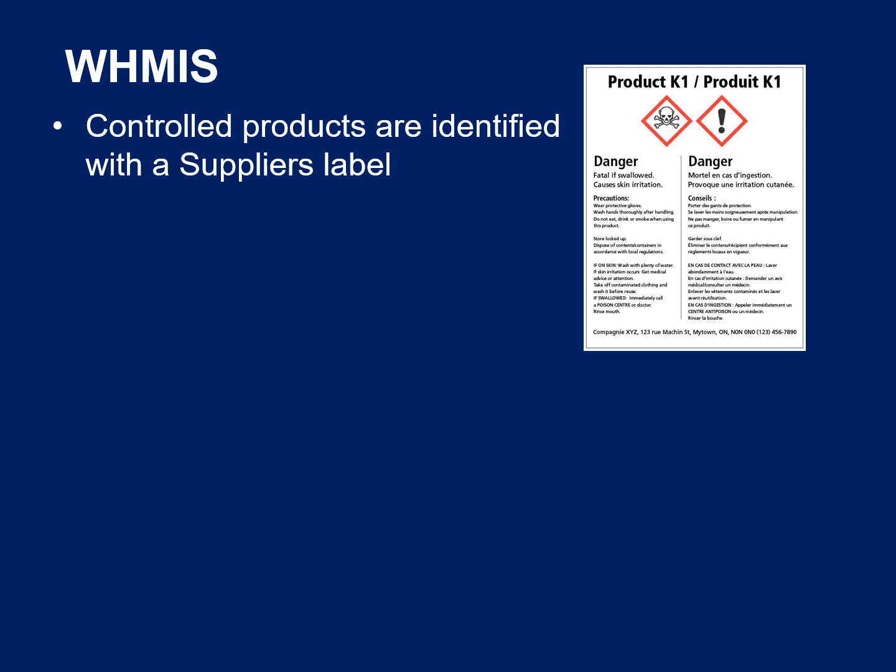WHMIS is the Workplace Hazardous Materials Information System. The purpose of WHMIS is to provide you with information on potentially harmful controlled products to help reduce the likelihood of disease or injury when working with or around them. Controlled products used in the workplace are identified with a supplier's label, such as the example at the top right shows, and must be stored properly.

A safety data sheet, commonly referred to as an SDS, is a technical bulletin which provides detailed information on the product's hazardous properties, information on how to safely protect yourself and others, and emergency information in the event of spills, skin contact, or ingestion. Review the SDS before using a controlled product to understand how to use it safely.

A copy of every SDS sheet must be provided to you and to LCG Residential Builders by your employer. These sheets are kept in the project office for reference by the project safety officer.

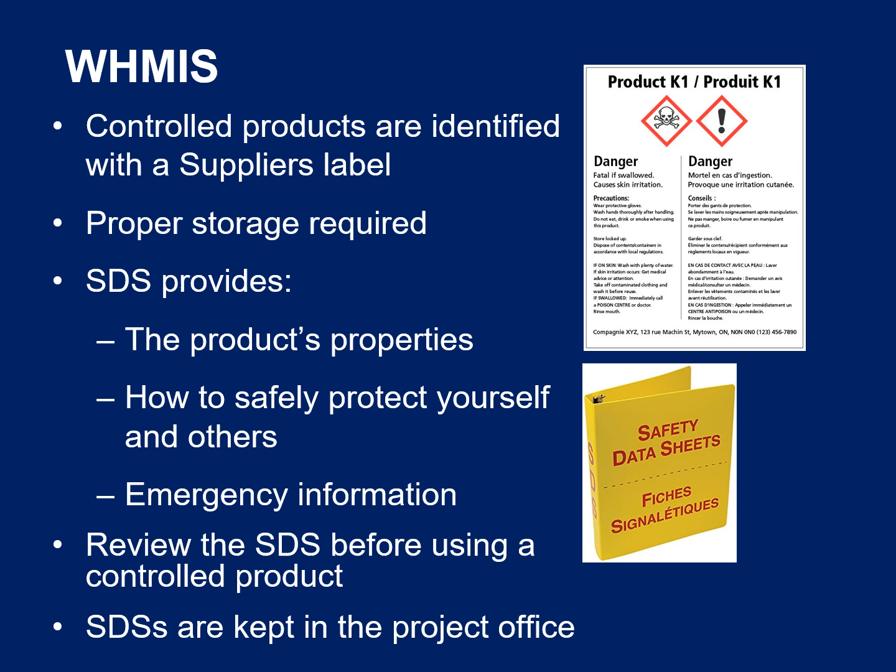Concrete and masonry products contain large amounts of sand and therefore large amounts of silica. Inhaling silica dust can damage your lungs over time. If you are cutting, breaking, or chipping any concrete product, you must take precautions to protect yourself and others against silica dust exposure. Effective dust control measures must be put in place to minimize dust exposure at the dust source.

Perform your work activities in compliance with safe work practices and job procedures, and follow your employer's silica exposure control plan. Properly fitted respiratory protection must be used by all workers cutting, drilling, or grinding concrete or masonry block.

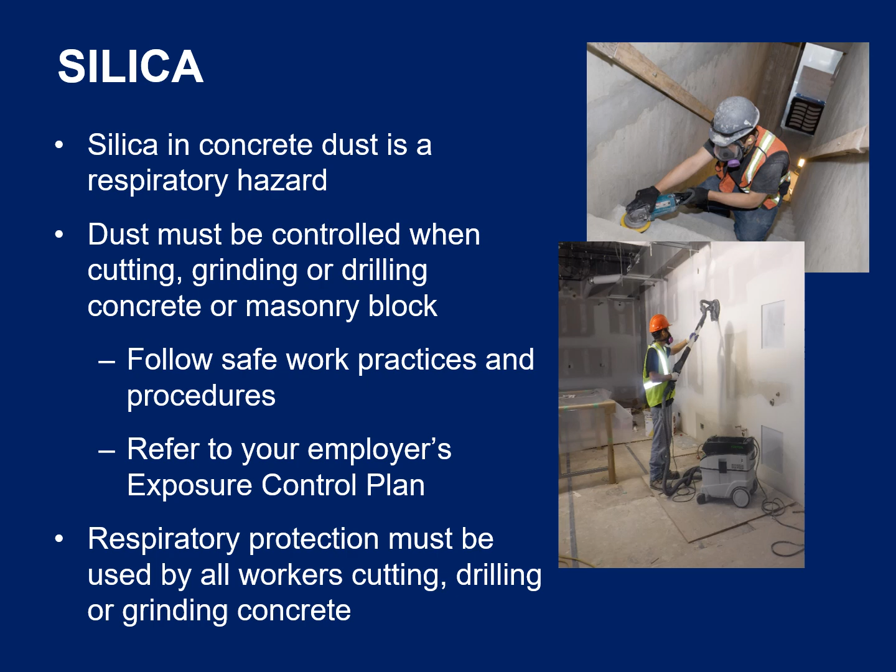LCG Residential Builders is committed to protecting the environment against harm. Prevent spills of fuel, oil, paints, solvents, and other harmful substances by using proper storage and handling procedures. Any spills of harmful substances must be contained and cleaned up quickly. In the event that a spill does occur, report it to your supervisor or an LCG representative immediately. Do not attempt to clean up any harmful substance unless you are properly trained to do so.

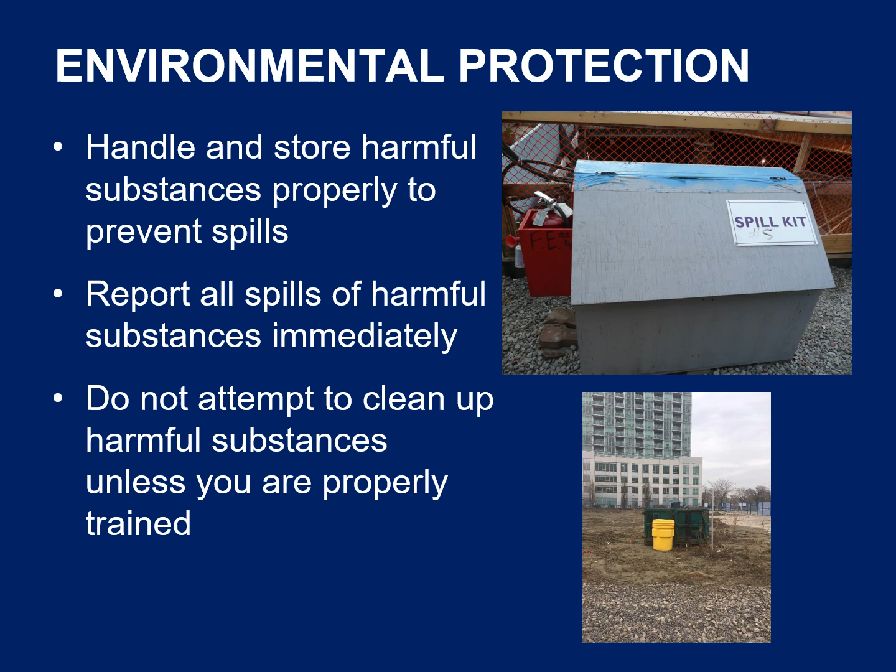Musculoskeletal injuries, more commonly known as sprains and strains, are caused by the aggravation of muscles, tendons, ligaments, joints, or nerves by work activities. Lifting, reaching, and repeating the same movements can put strain on your body and cause soreness or stiffness in the extremities. This condition has the potential to worsen over time and can result in serious injury.

To prevent MSI injuries, workers need to understand the hazards associated with their tasks and be capable of identifying the signs and symptoms of musculoskeletal injury. Stretching exercises before work and proper lifting techniques can help prevent these injuries from occurring. Please report any of the signs or symptoms described here that you may be experiencing to your supervisor or first aid attendant immediately.

You can avoid overexertion injuries by not lifting with your back. Grip loads firmly with your back straight and lift using your legs wherever possible. Ask for help from a coworker if you have to carry a heavy or awkwardly sized object or load.

Avoid putting your body in an awkward position, like when leaning, reaching, or twisting when lifting, and stretch regularly to loosen muscles. Most overexertion injuries can be avoided if a person warms up and stretches the body before beginning work and throughout the day, especially after breaks.

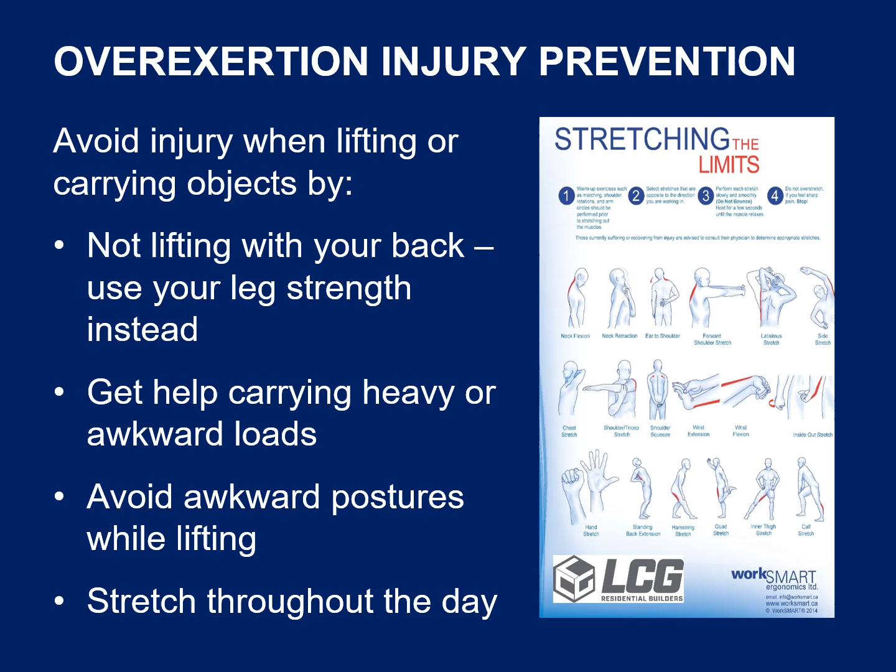Please review and complete the orientation form and sign your name. You'll be given an orientation decal that you must attach to your hard hat. Finally, please remain seated while LCG's representative advises you of any additional information related to your safety and answers any questions you may have.